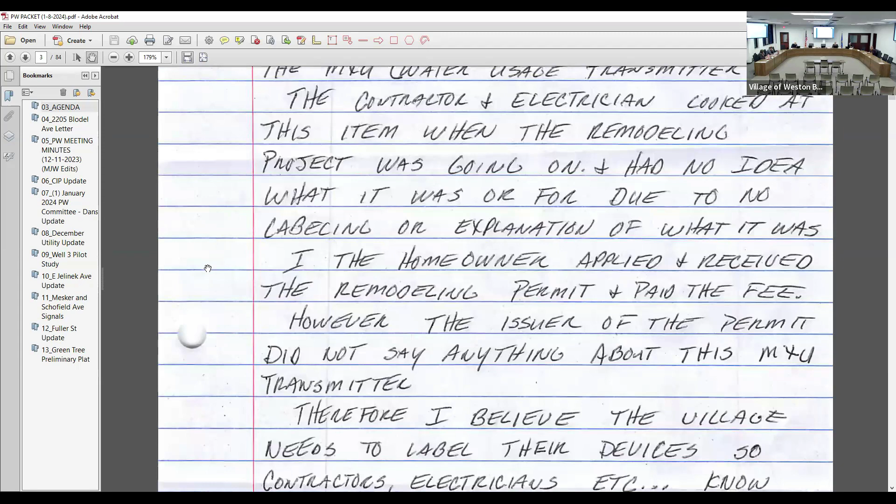But I guess, did everybody read his letter? Yeah, I read the letter. I couldn't even figure out how they did that.

I'll just be like, of course you have them. Like, what do you think that is? I mean, it's not the first time he's there. He's been there probably for a while, right?

Yes, that's the same landlord, right? Owner. I believe so, I'd have to look to see when they bought the house. But he's been there for a while, and he has seen it hanging on the wall. He didn't question what it is, then he went to change siding, pulled it out, threw it out.

I mean, this is the round box, that whole— yeah, it's actually the square box. Oh, that square gas box, over the black hockey puck. On my house, I think they're kind of a beige color. Yeah, correct.

I don't know, so he wanted me to refund, cancel, or void it. I said, well, no, we charge all of our utility customers the same way. You can, I guess, request that the committee waive it, but I can't do that personally.

So how much did you bill them? I had it up earlier. It's $247.48.

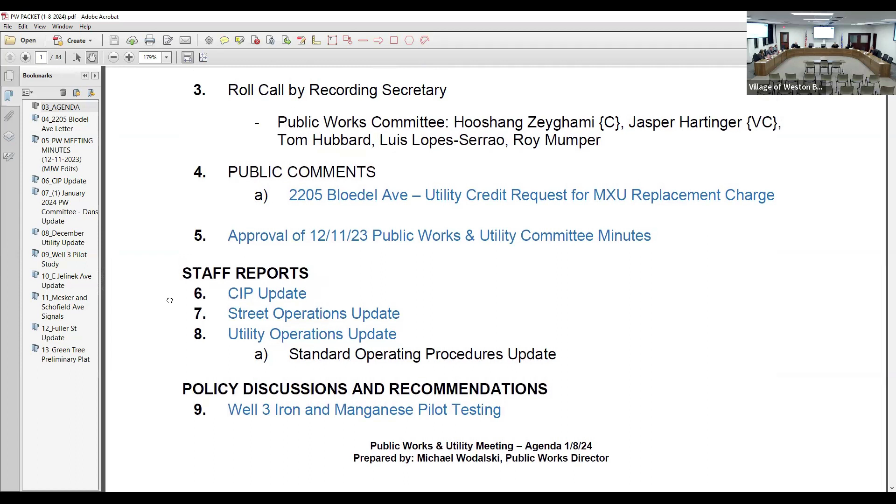Any questions on that? No questions. What he's gonna do is bring us the proposal and all the documents he has for that intersection with regard to the TIP, and also have it on the agenda for discussion.

Unless you need something additional, please. No, the engineer is gonna do what they have to do once we put that out.

Okay, thank you. Item 5: approval of the 12/11/23 Public Work and Utility Committee meeting. Move to approve. I'll second. Discussion? All in favor signify by saying aye. Aye. Opposed? None.

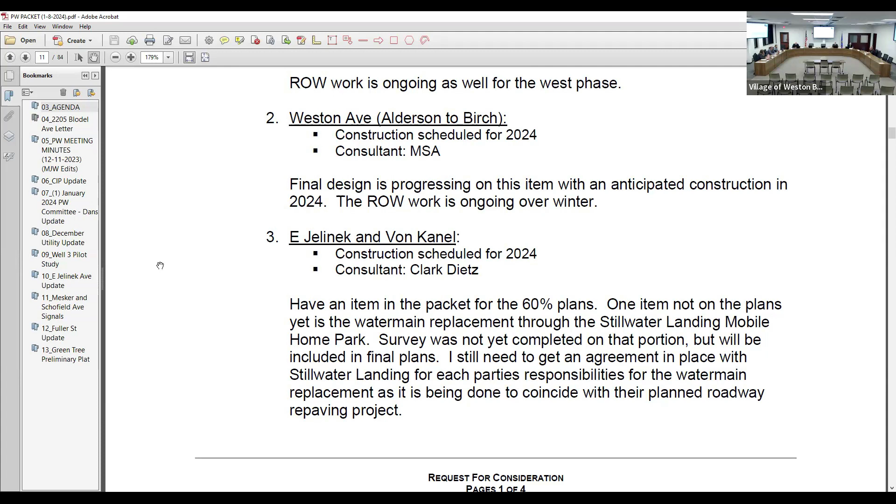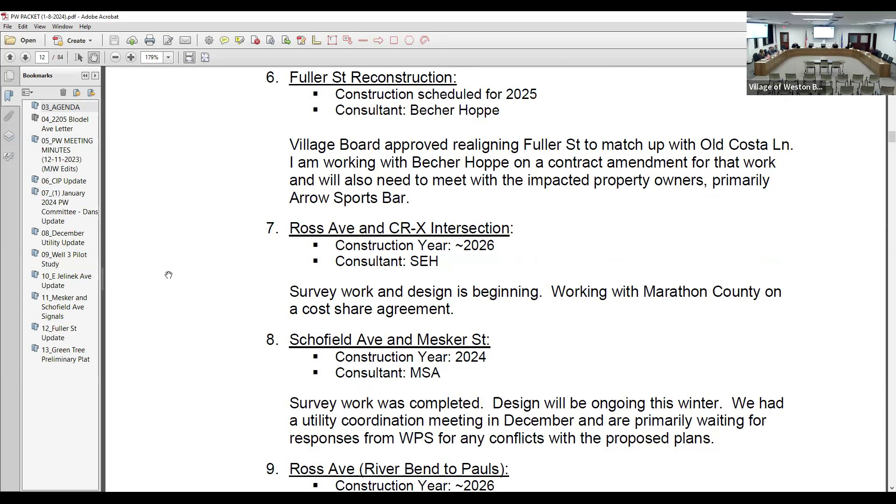Thank you. Staff report, CIP update. Haven't had a whole lot construction-wise since the last meeting in December. Did have a couple design review meetings with Clark Dietz for the East Jelinek and Von Kanel project, as well as the Jelinek resurfacing in front of the junior high and senior high. We also had a DOT meeting with the city of Schofield regarding the Ross Avenue Metro to Alderson redo, and talked with Becher Hoppe about some of the Fuller Street future design impacts. I think I have that one later in more detail.

And I got the RFP out for the Riverbend to Paul's reconstruction on Ross Avenue, so we should have those at the February meeting to review for awarding design on that project.

Construction on Ross Avenue, from where to where? Riverbend to Paul's. My question is, is that all in the town of Weston or is part in the village? It's both. So the first part's gotta be in the village, right? Yeah, the first stretch, the south part's all in the village, and the north part—probably half of that stretch—we have about 3/4 of the road. Then as you head north, right away, both sides of the road are currently in the town. Once you hit Mock Miller Park, it's half town, half village.

So how are we gonna establish our cost sharing? We also have an agreement with the town that'll need to get approved, but it's based on frontage—the same way we handle anything with Rothschild or Schofield. If we have, say, a mile of roadway and they have a mile of roadway, we split it 50/50, but if it's 0.3 and 0.67, it's one-third, two-thirds. I just wanna make sure we agree on everything before we go to design or construction. Yeah, and since it's our utilities, any water and sewer design would be 100% the village's—the town wouldn't pay for that.

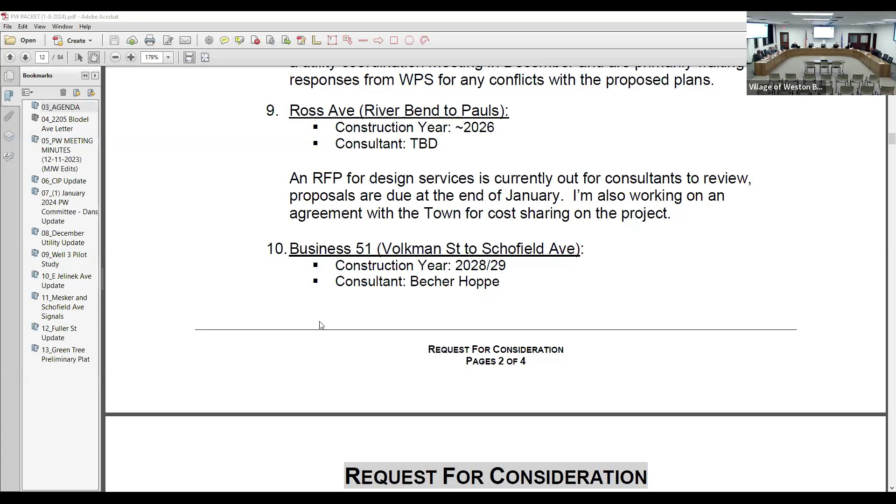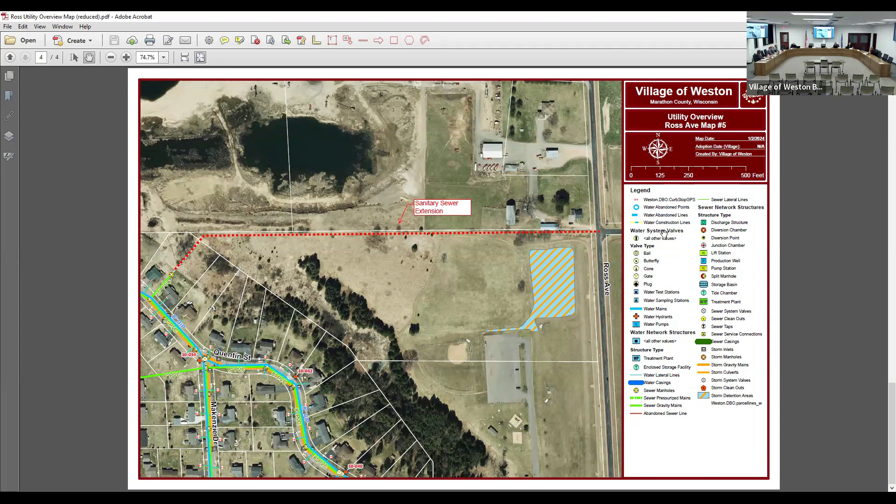Okay, the other one we can get to when we reach that agenda item. Any questions? Anything else, Michael? No, that's probably a good run through there.

Okay, item 7, street operation update. Well, looks like tonight into tomorrow we're going to get our first big snowfall other than Halloween. So how much are we going to get? 5 inches is what National Weather Service is forecasting at 4 o'clock for here, with 20-mile-an-hour plus winds, and then they're supposed to die off, and then another 1.5 inches Thursday night, Thursday later, they're talking.

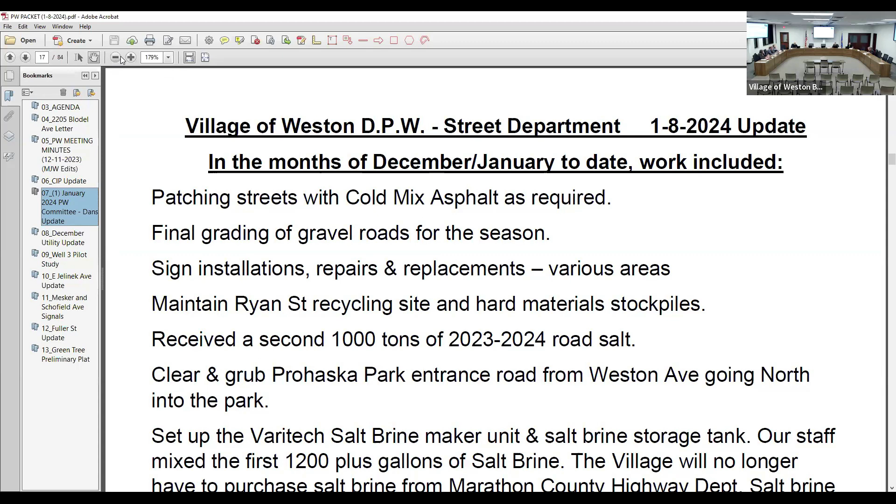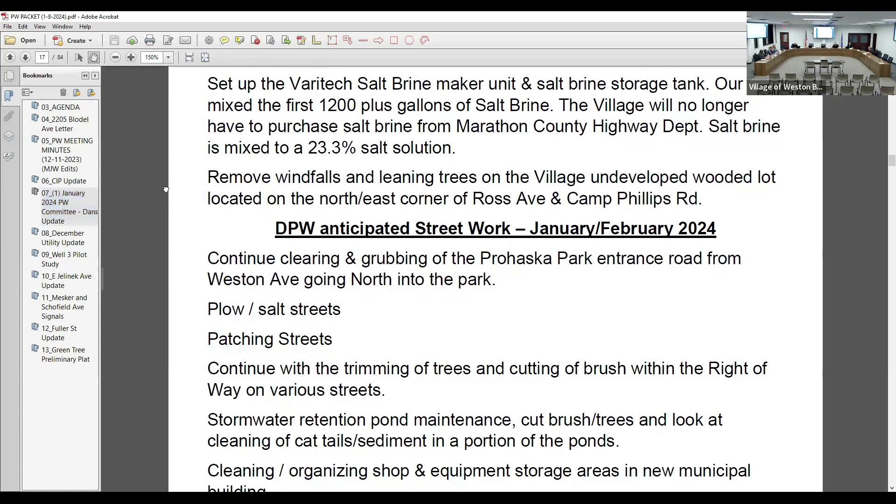So far, between December and January, we've been working on trimming trees, got the mini excavator out, brushing around some of the retention ponds. We try to get to those every year, 2 years at the most. We've got more to go. If we don't get a foot or two of snow, we keep on going on that. We've been working inside the shop, finally finding time to get things done we never could before because we've been too busy. In the wash bay, we put some clips on where we can hang things and handle the odds and ends so it's serviceable.

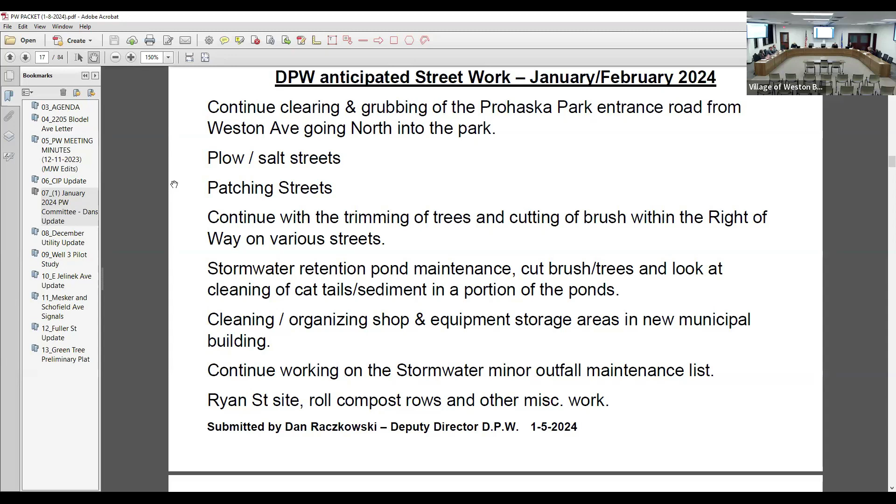The brine maker we bought when we lived at the old building, the guys hooked that up and got it running, so we don't have to go to Marathon County Highway Department and buy salt brine anymore. We make our own here. Got a hydrometer hooked up. It's a Varitech brine maker. We had a brine maker at the county too, an older unit that came out of Dunn County. I talked to them, they upgraded and bought one of the big fancy ones where you can mix salt brine and mag chloride and beet juice together. We're just running straight salt brine, that's all we really need, we don't have to get too extravagant. So we pre-wet the salt - all 6 of the patrol trucks have pre-wet units on them, all computerized. So now we have our own salt brine, which will be nice and save us money and time having to run up to Marathon County to get it.

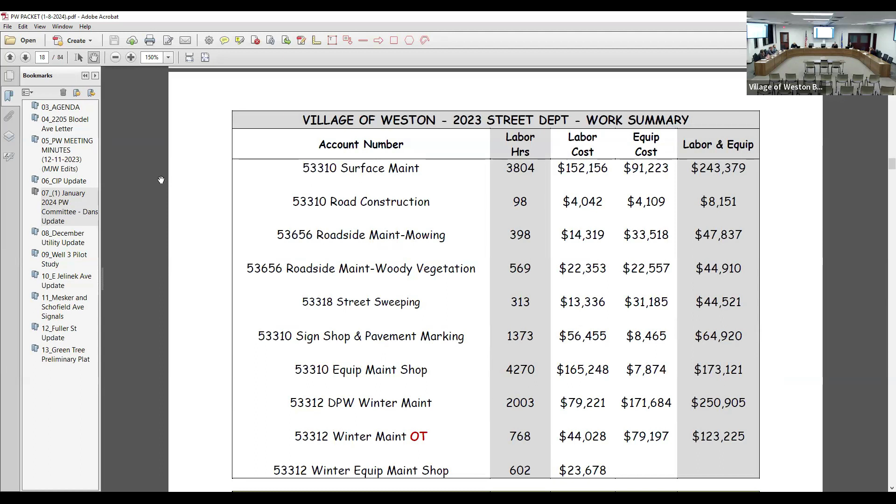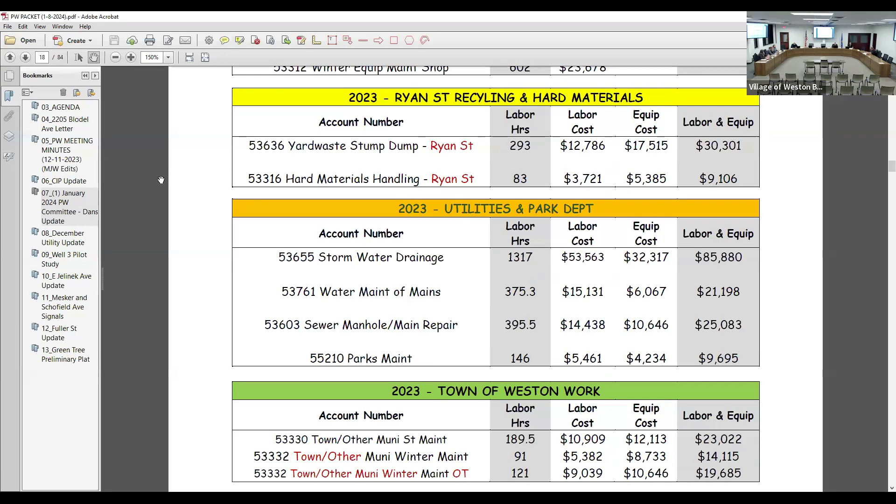It's mostly been brushing work and stuff like that, a lot of woody vegetation work and odds and ends, different things that have come along. That's what we've been up to. We'll see what Mother Nature brings us for the winter, we've still got more of that stuff to do yet. There's minor outfalls, I forget how many, there's some work that needs to be done where there's culvert ends basically on the end of a drainage line and there's a culvert that needs to be brushed around, different things that need to be done. We'll keep going with that, we'll see what Mother Nature throws at us, I guess. We kind of schedule our work around everything like that, just like anybody working outside.

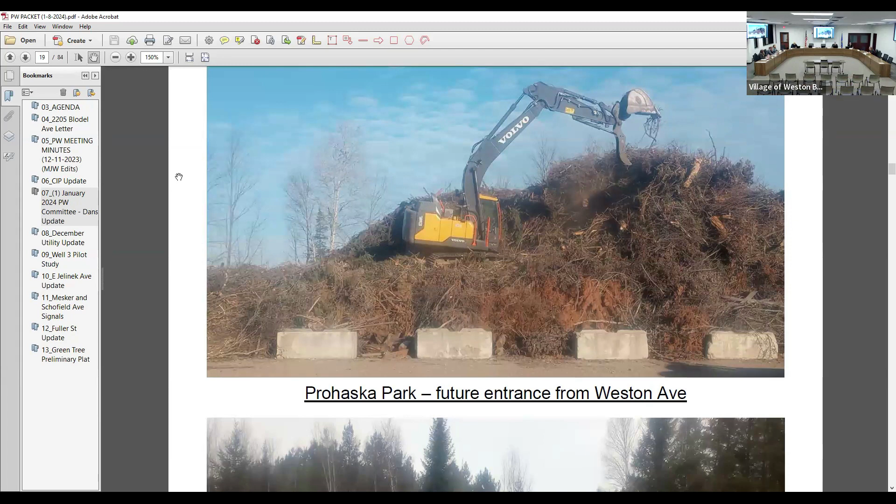I didn't have this on the agenda, but Sue's Ginseng bought - we had 4,480 cubic yards of leaves pickup from this fall. They bought everything for $1 a yard. So between them and Randy Warden, they purchased about $8,000 worth of compost that we had extra. So in 2023 we made about 12 grand just selling that stuff, which was kind of nice, a return on our investment. At least it's better than giving it away, so there's a value to it.

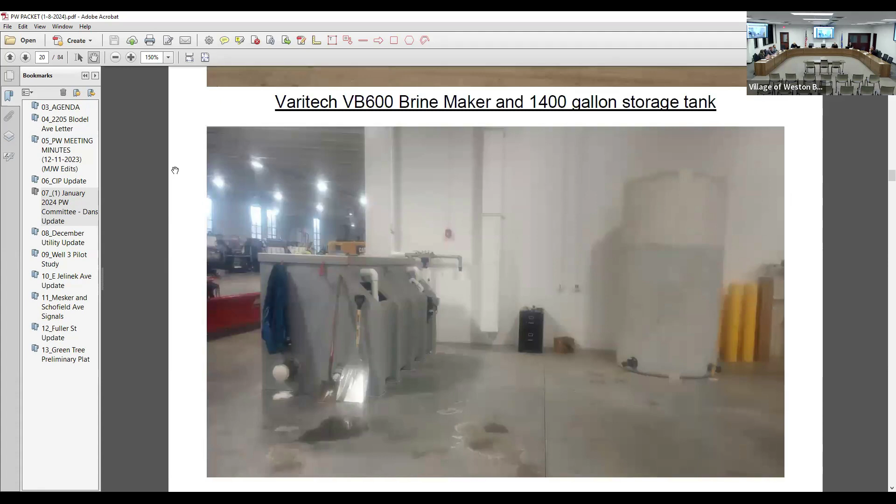Then, one thing too Shane, we got to the trees over here last week. Oh, you did? Yep. Good, thank you. Yep, we didn't clear right up to that duplex there. Like I said, I talked to the woman that lives there and she asked for a little buffer, that's fine. But we took all the leaners out, and took some of the old thin jack pines that are going to die anyhow, and kind of cleaned that up.

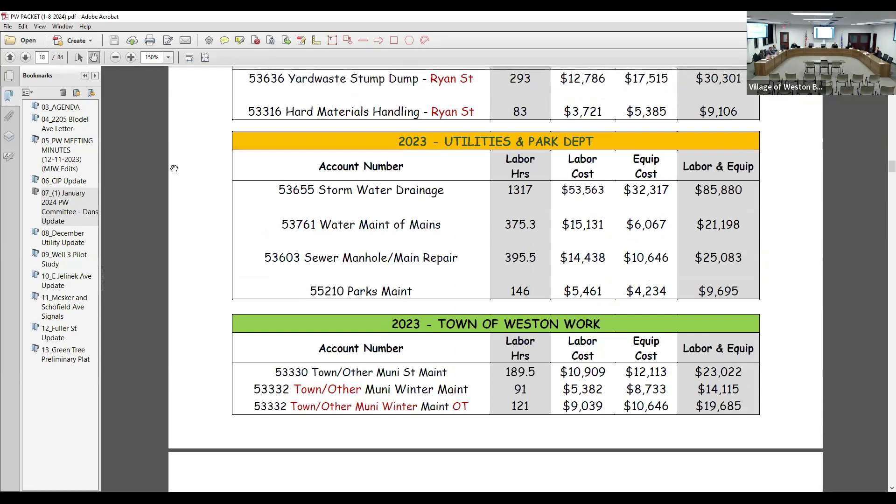It's kind of halfway decent; we do have to go this spring. I talked with her about the back side of their duplex. Originally when this building was built, there was silt fence up on the south side of our fence. She asked if we could, when we pulled the silt fence and nothing happened where it got restored, mow it in the spring, so we're going to do that. That way when they mow their yard, they can get right up to the fence on their side, even though it's our few feet of land there.

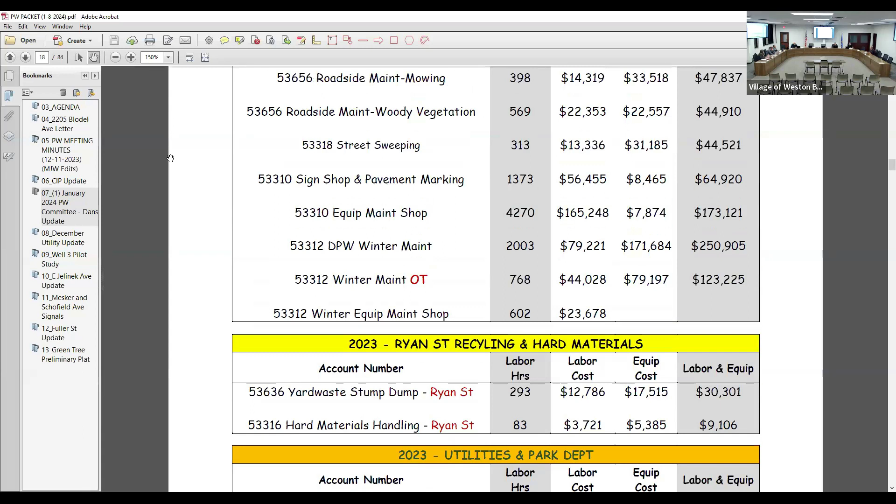In the report, if you look at page 3, I broke down the whole year. I have a spreadsheet that every time I enter time, like today when I did last week's time, everything goes on a big spreadsheet, all the equipment, all the material. I just took that, sorted it out, and threw some numbers at things so it would give you an idea of where our hours were. It doesn't capture everything right down to the penny, but it's a pretty good rough idea of where we spend our time in a year.

I didn't sort it by numbers, but equipment maintenance in the shop has 4,270 hours. Part of the reason that's high is because when we moved into this building, a lot of the stuff we did with the move we just charged to the shop, because I wanted to keep it in one spot. I'm expecting those numbers will drop somewhat as we come into 2024.

Surface maintenance covers everything from patching potholes to all the odds and ends stuff, shouldering, everything that's done with the road, asphalt repairs, stuff like that goes under surface.

Road construction is when we do a construction project, like when we did East Jelinek, we cut down that half mile and rebuilt that piece of road. That would have gone in 2022 under road construction.

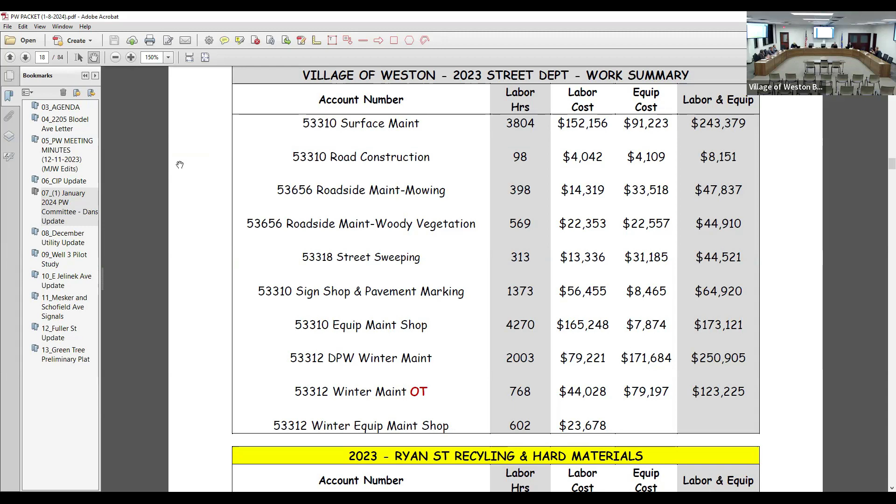Roadside maintenance and mowing is anything we do with either what we call the lizard, that's mowing like along Schofield Avenue, or when we take the John Deere boom tractor out and mow the right of ways in the country, mowing wider with the boom on it, and then we use it for cutting brush too, to keep the brush down.

Street sweeping is just a given, that's anything we're doing with the street sweeper. In the spring, we'll take a loader with a big power broom on the front. Rather than running the street sweeper up and down from the center line, we'll broom it easy, hopefully on wet days, kick it out in a windrow to the outside, and then take the vacuum sweeper and sweep.

The sign shop and pavement marking is everything John Yonker does with help, when it comes to repairing and installing signs. We bought that walk-behind Graco sprayer this last year, so he's been starting to get us caught up on restriping our crosswalks, and any special stuff like special markings, arrows on a roundabout, the little yield triangles, that kind of stuff all falls under that.

Equipment maintenance is the shop, that's everything that goes on in the shop. That includes cleaning the shop, which our staff takes care of. We get a rainy day or whatever and all of a sudden it's getting pretty grubby, so we have to clean it, and everybody gets together and takes care of it.

Winter maintenance was everything in the 2023 calendar year that we did when it came to plowing, salting, hauling snow, anything like that goes under winter maintenance. You'll see the overtime hours for winter maintenance right below it. The last one on the top list is winter equipment maintenance in the shop, like when they go out, they were out over the weekend. Today they'll go through the trucks, clean them somewhat because we were going to reload for tonight into tomorrow, that's maintaining that winter equipment.

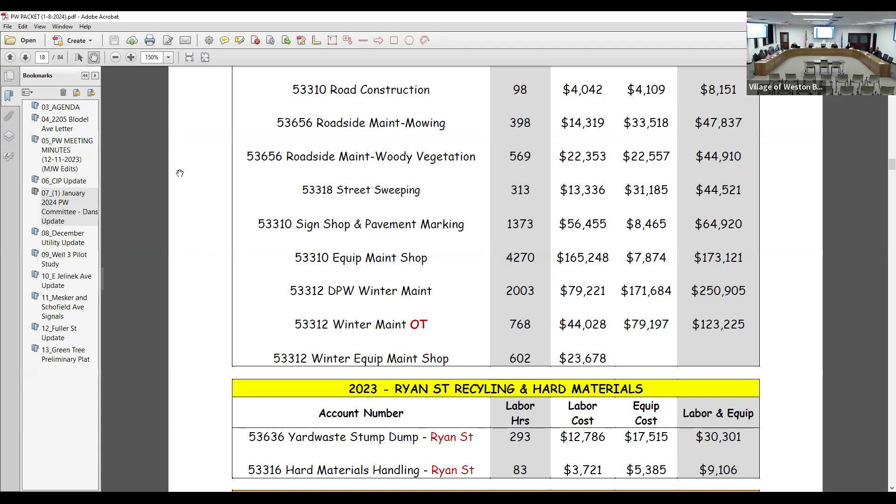Then as you scroll down, you'll see the hours that we put into Ryan Street. The yard waste, they nickname it the stump dump.

So anytime we got to go and push up brush, push up leaves and that kind of stuff, or haul the leaves down below and put them in rows for compost, or roll the rows of compost. We currently have, I think, either 3 or 4 150-foot long rows that are probably 8 to 10 feet high to a peak.

We take a thermometer and have to take temperatures on them once a month, and then we'll roll those rows over — that's what the DNR wants. So it gets some air in there and keeps breaking down, and we have to keep records of the temperature, because if you're gonna use compost, they want to see it get up to 130 degrees in the middle. That kills off the bad bacteria.

And then the hard materials handling would be anything when it comes to stockpiling things at Ryan Street — all of our gravel, sand, stuff like that. If we get sand hauled in, we gotta push it up. That's what it kind of comes out of that fund.

And then the stormwater drainage, that's anything to do with stormwater. Like now, even when they're out brushing with the mini excavator around these retention ponds, that gets charged to stormwater drainage. Anything with curb, inlets, catch basins, storm sewer, that all goes underneath there. When we did asphalt overlays off of Birch Street on Leyburn and all those streets this last year, when we raised the manholes for the storm sewer, that 1.5 inches for the overlay gets charged to stormwater.

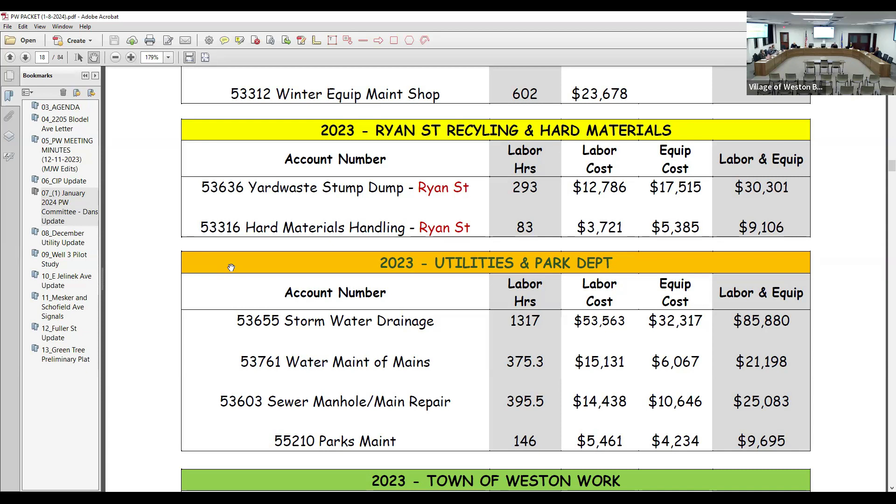On all the storm sewer inlets, any manholes, the rectangular storm sewer inlets, we have the same thing — that's what we use. And then parks maintenance was anything we help the parks out with. Sometimes they're taking trees down, we grind stumps in the spring. If they took trees down, we'll rent a stump grinder, put it on that newer skid steer we've got, and go out and grind their stumps or whatever we've got.

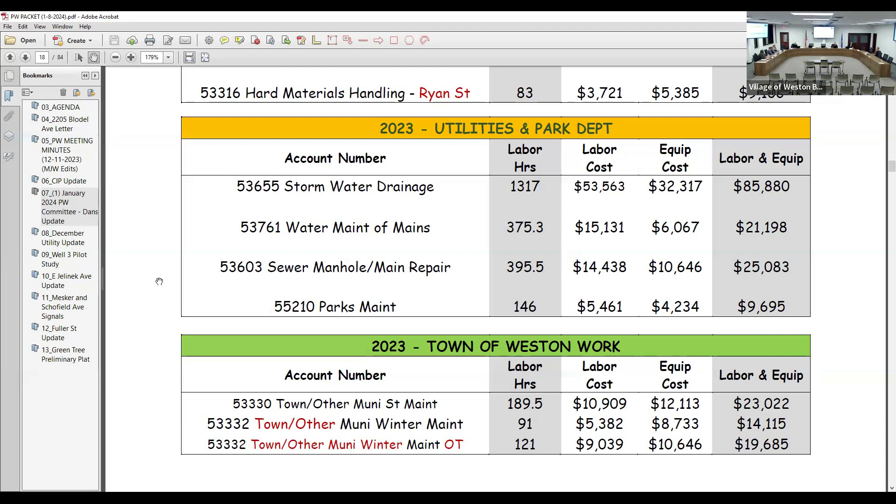How is the — go ahead. How's the, we had problems last year with people illegal dumping over at Ryan, is that getting better? They're not out on the streets so much anymore. I was just up at Ryan Street today and I see somebody dropped 3 tires off up there. Everest Metro's helped a lot at Ryan Street because they've been coming through there, and I think the word's gotten out where people aren't doing that as much as they used to anymore.

So the dumpster's still a little bit of a problem, but for the winter we pulled the trail cams down, and someday if we get power out there it'd really be nice to have a video camera. Then you could get them, because it's kind of a pain having Randy lift me up in the loader bucket to the telephone pole to pull the chips out of it and put different ones in the trail cam. But then when you get 600 pictures... it's helped, I've sent them to Everest Metro — sometimes you'll snag somebody. Is that something that's worth looking at from a cost standpoint?

Yeah, I guess it's kind of the cost benefit. I mean, if we're spending $3,000-4,000 in extra garbage, or we have to spend a couple hundred thousand dollars to get power extended.

I think the word gets out, and that's the main thing. Once the word gets out, it'll curb most of them. You never stop everybody, but they pinched a few contractors, and then the word gets out. If they're just bringing a little bit of brush here and there, it's not a big deal. It's when they come and dump a load of slop, or it's more. What gets you the maddest is when they take and throw something in the middle of the pile, and then you got to pull the pile apart to get it out.

Somebody dumps something on it, and that's when it's a pain. It's kind of derogatory, the guys, it makes them crazy. Makes me nuts too. But for the most part, I think just having the trail cams up is helpful.

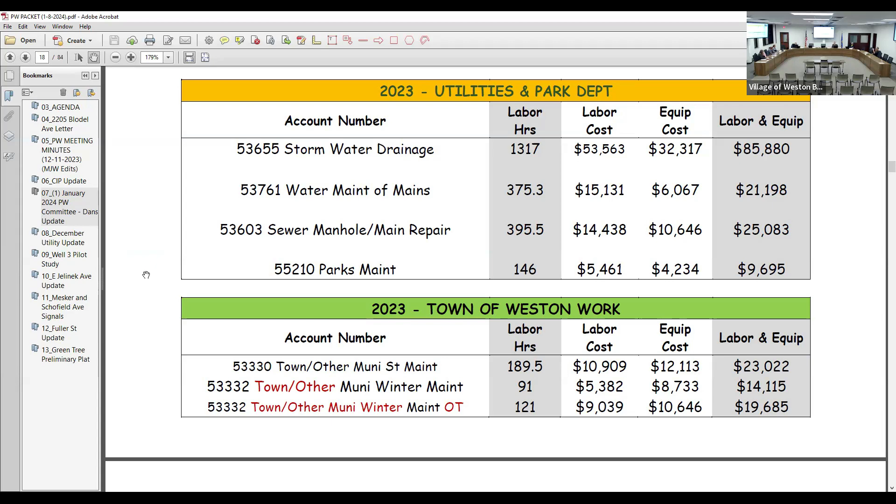Tushane, did you have a question? I was wondering, there's no total in there. Any reason for that, or total of the total cost for all these, each section you have there?

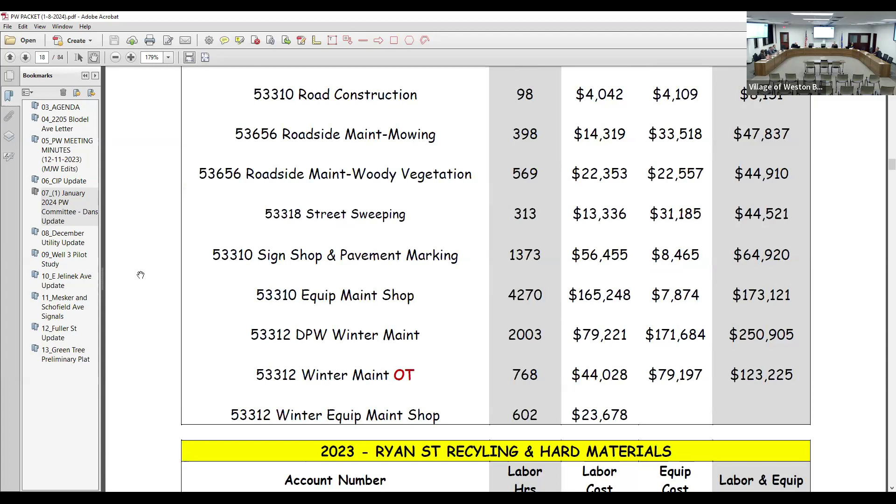I can total it and send it to you if you want. It would be nice to see it. What's the total cost for each part you have in there?

I guess, yeah, I would like to see. Well, what I'd probably do is ask Jessica for a report from finance. That would be to the penny, you know what I mean?

Because what I do is I enter the time electronically. The guys have their hourly into our software. That calculates their paychecks. Everything else I do, because one thing you gotta remember on this, the equipment is factored into here. And the equipment rates, I just updated them again, come off the Wisconsin DOT website.

So those are the numbers I'm using. She wouldn't have that, she would have the labor expense. I could pull the other stuff, but if you want a total, I can run it.

Sure. No, they use DOT, why not Marathon County? That's what Marathon County uses. Use the same thing. And the way it's generated is all 72 counties in the state sign a routine maintenance agreement with the DOT.

Every piece of equipment they work on or buy, when they buy it, you can depreciate it out. They've got a schedule for depreciation. Everything that goes into that piece of equipment, they have to track. Fuel, tires, labor for parts, the mechanics labor. Each of the 72 counties sends that to the state.

And they have classifications for all the different pieces of equipment, and that's how they develop the rates, and that's what they reimburse the county for. So it's the same thing that the county's getting reimbursed for.

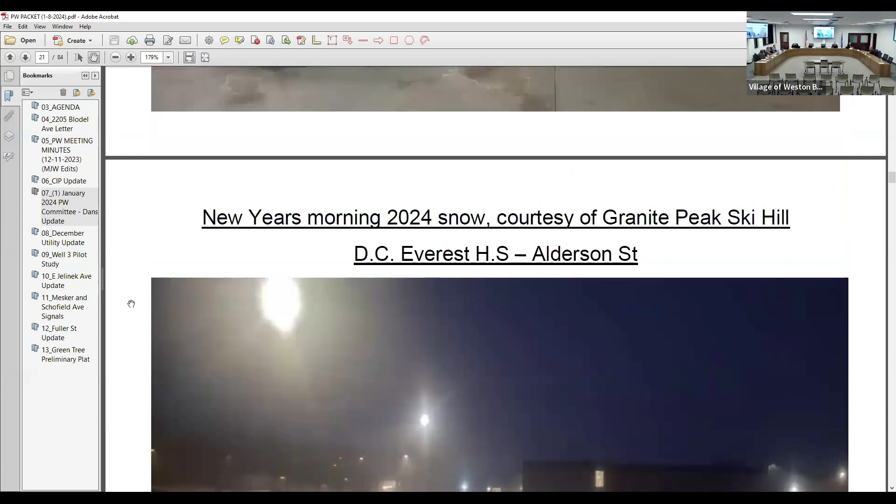Utility operation update, you're gonna take care of that, Michael? Sure, Josh is homesick today, so I guess I'll cover it.

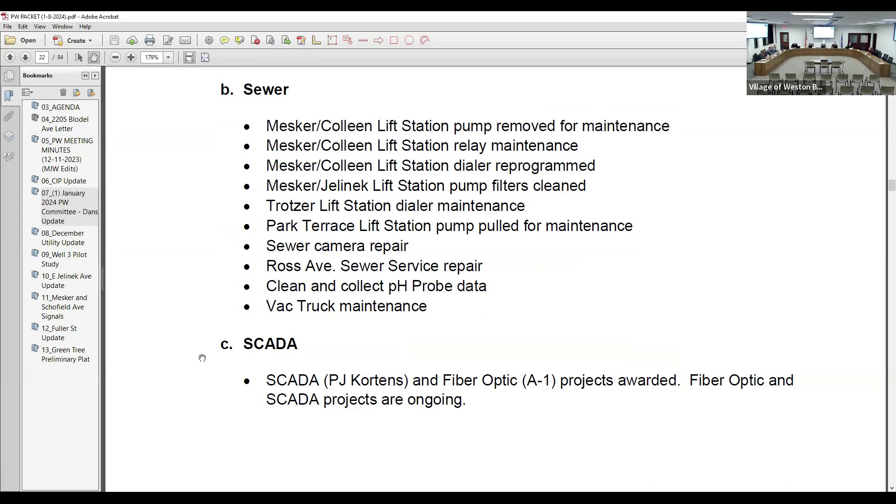Listed kind of just the general pump maintenance, some of the chemical feed pumps. We had some meter cleaning repairs over at Cary, some manganese backup or buildup in those, and got quite a bit of our large lift stations taken care of with the warmer weather. So good opportunity there.

The SCADA project, fiber is more or less run as far as the conduit, and they're getting the cabling pulled on that one. PJ Kortens should be getting pretty close to reprogramming all of our lift stations for the SCADA network, and then getting the water systems on the new SCADA as well. They indicate to have that done by mid-March, which is ahead of schedule, but we'll take it.

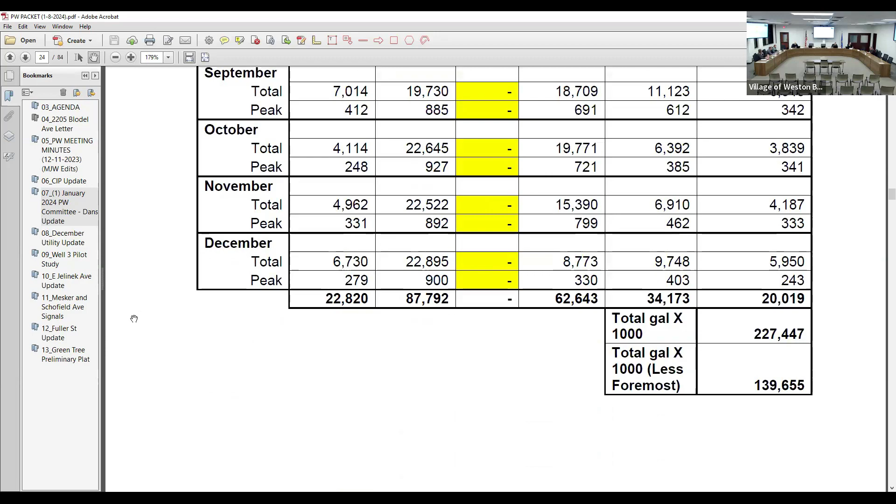I don't know, not a whole lot. There's maybe else in here that's real eye-opening. And then he did add a few more of the SOPs for some of the various items here.

We did briefly talk about well 7 and 8 going up, we'd like to do a little thing out there. When they're ready, we can give you more information, but it would be nice for the committee and then the Board of Trustees to just recognize that.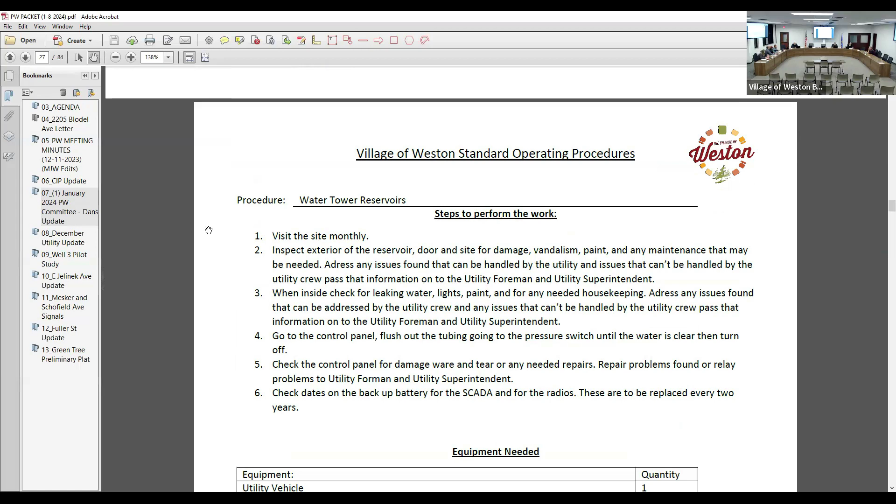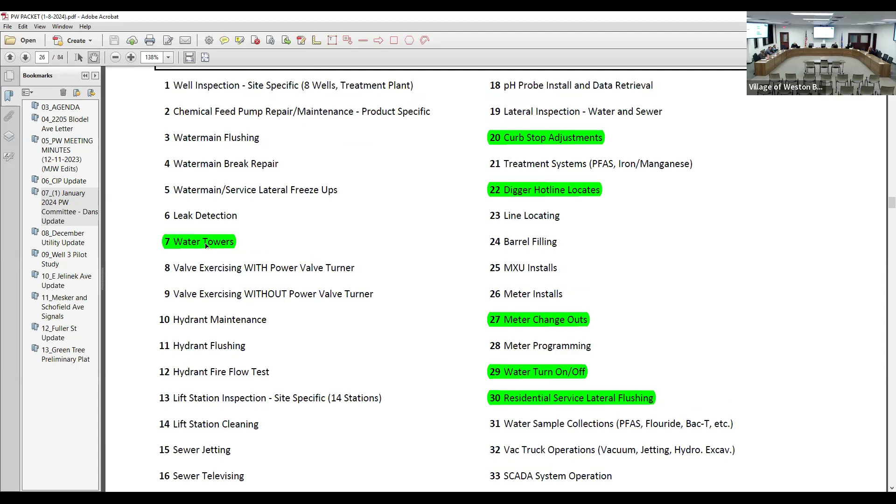Okay, and here you have the standard operating procedure. So we wait for Josh to come back. Yeah, I guess they're just adding in there. I know trustee Hardinger asked that those just kind of be noted monthly here as we get more added in, so we just wanted to keep everybody up to date that we're getting those taken care of. I think what he has here is pretty good. Yeah, no, it looks good.

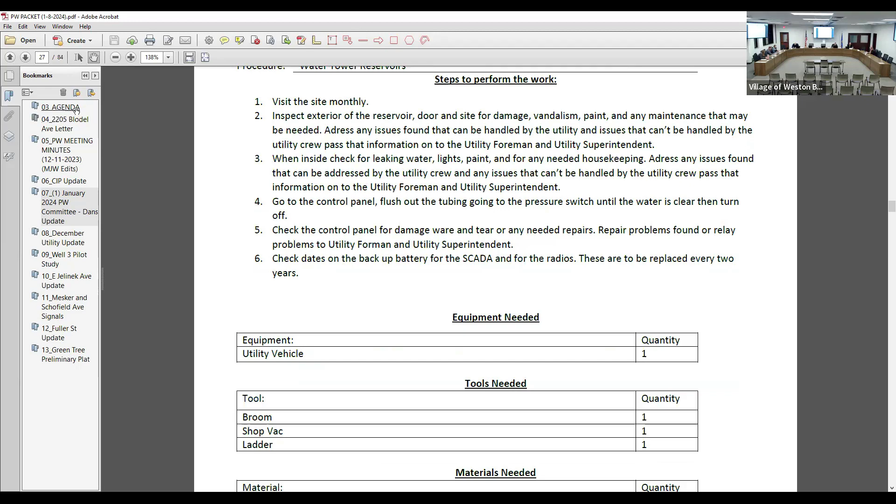Okay, all right. Policy discussion and recommendation, item 9: well 3 iron and manganese pilot testing.

As part of the PFAS treatment system for wells 3 and 4, when we submitted our safe drinking water loan application to the DNR, they had asked that we separate out wells 3 and 4 due to the fact that well 3 needs iron and manganese removal prior to PFAS treatment. They're requiring that we have a pilot test done to show that the system we'd be putting in place would adequately remove the iron and manganese from the water prior to the PFAS treatment.

So the first step would be getting that pilot study done. We have a proposal from Water Surplus, which is the same company we currently are leasing the temporary PFAS treatment system from. I'm talking with AECOM. The proposal from Water Surplus was less than what AECOM would be able to give us for a proposal for pilot testing, and they'll take care of all the DNR reporting and submittals as part of that.

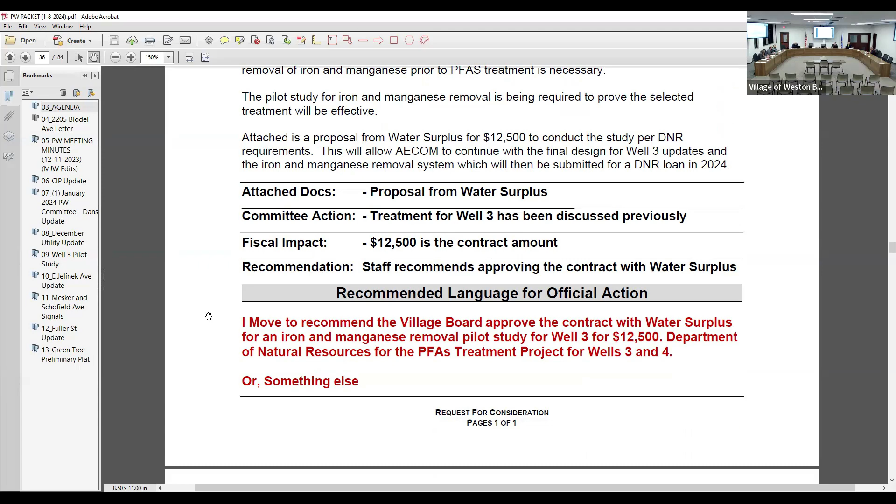So I guess I'd recommend we move forward with the pilot testing for well 3 from Water Surplus for the $12,500. I see in his contract, he explains his insurance and everything else in there, but I think he should give us a certificate of insurance with the name of the village in there as a part of that insurance also.

Yeah, and we always ask for that before they come on site. Do you have to be additional insured or just a certificate of insurance? Yeah, usually we ask to be named on the certificate. But named as a certificate holder or named as additional insured? As additional insured. Okay, not certificate holder. Yeah, that's what I wanted to clarify. Yeah, because one means everything and the other means very little. Yeah, no, we get added on there. Yep, I think we should be there because it protects us. Yeah, that saves you from being sued by somebody who's not your employee getting hurt. Right, right. Okay, what's your wishes?

I would move to recommend the village board approve the contract with Water Surplus for an iron and manganese removal pilot study for well 3 for $12,500.

Department of Natural Resources for the PFAS treatment project. I probably did delete that. Yeah, you can. Sorry, we need to include that, right? Is there a second? I'll second. Discussion?

All in favor, signify by saying aye. Aye. Aye. Opposed? I have it, thank you.

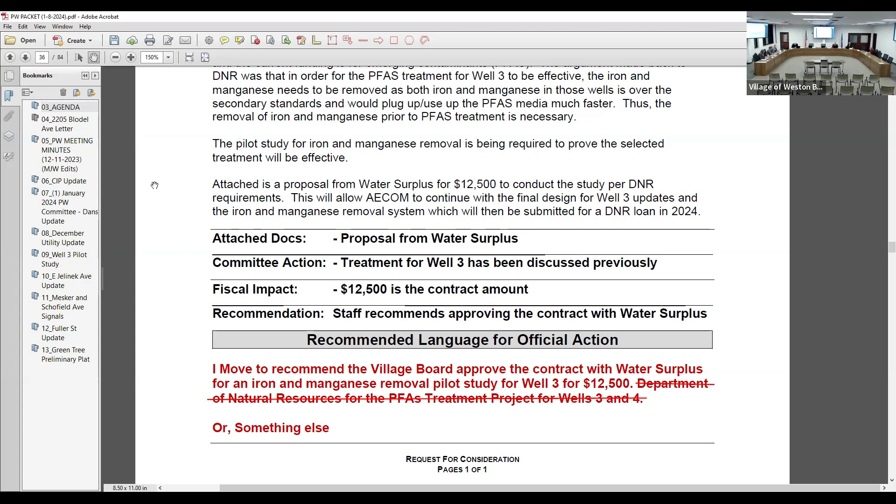While we get well 3's final design taken care of through the DNR, in 2024 we'll resubmit well 3 for the safe drinking water loan. So it'll stagger by a year, but we got as much as we can into the well 4 design, so the well 3 work is just the iron manganese removal. It also helps maximize the principal forgiveness we got for the PFAS treatment, so the 3.14 million we got is still usable. So that answered the question.

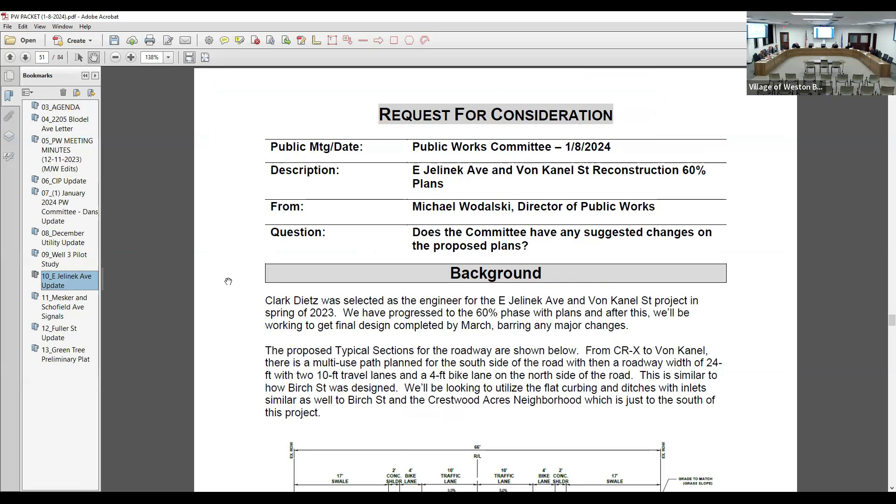Okay, item 10, East Jelinek Avenue and Von Kanel Street reconstruction, 60% plan design discussion. As I mentioned, we had a couple meetings with Clark Dietz this fall. Plans are at the 60% phase, so I just wanted to get concurrence from the committee that we're good with where we're at, and we can get these into final design.

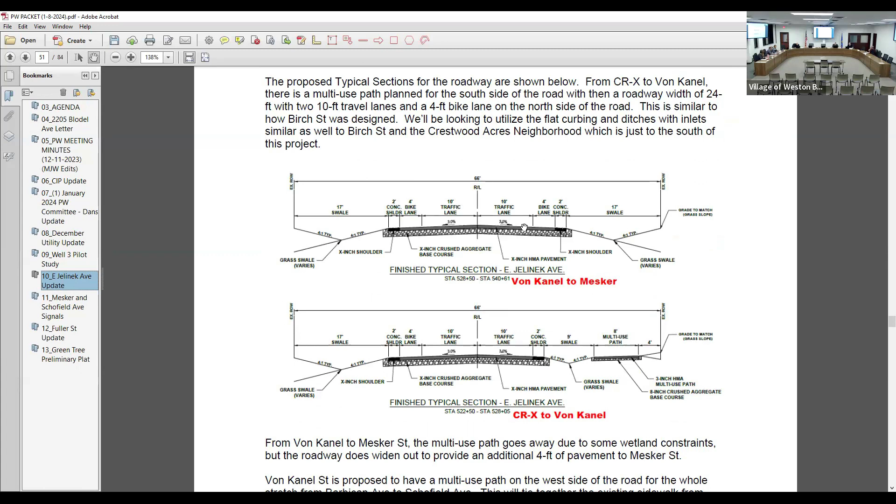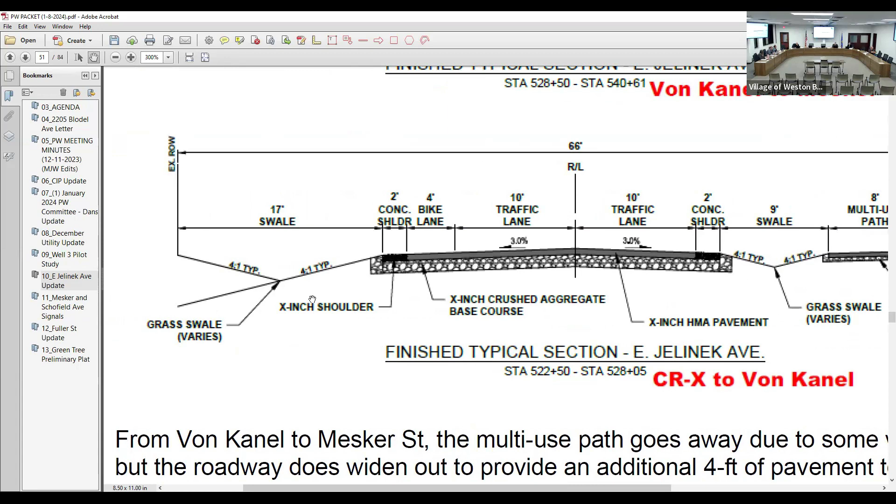So these are the typical roadway sections we're looking at. From Von Kanel to CR-X, we would have a multi-use path, generally on the south side of the roadway, and a swale. Let me blow this up so you can see better. A 9-foot ditch would use the same flat concrete shoulder that we have over in the Crestwood Acres neighborhood. We have 2 10-foot travel lanes, a 4-foot bike lane for westbound traffic, a 2-foot shoulder, and then a swale on the north side matching into the existing right of way.

On East Jelinek, east of Von Kanel to Mesker, the multi-use path goes away and we have wider pavement, 14-foot lanes, striped as 2 10-foot lanes with a 4-foot bike lane or paved shoulder, the concrete shoulder, and ditches matching into the adjacent property. I should have noted, this is the same configuration that would be used on Von Kanel, except the multi-use path is proposed on the west side. Otherwise it's the same, still using ditches and the flat concrete shoulder. So that's currently what's in the plans, at 60%.

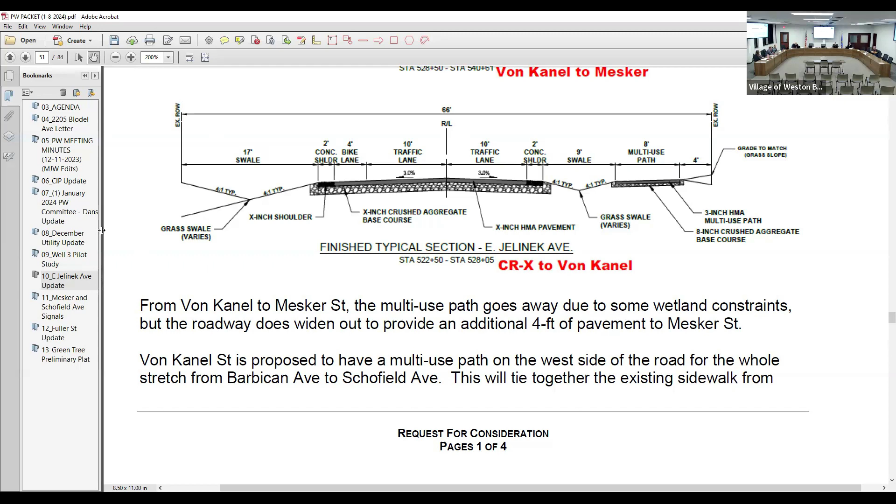Did you do drilling at the intersection of Von Kanel and Jelinek? Soil borings were done. When was that, last month? I just want to know where the rock was. I'm still waiting on the report from AET, but the drilling was done, so we can send the boring out and read it. That's okay, I think we should know that.

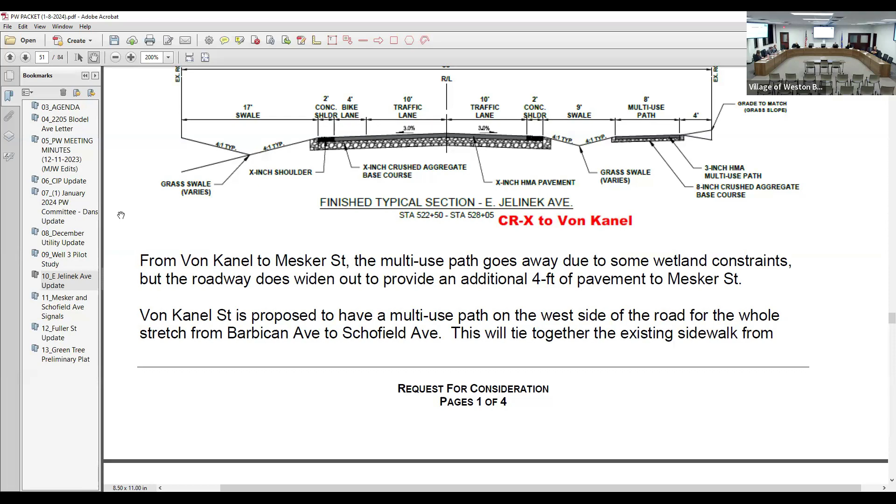And the other thing is, it's showing 3% slope on the road, why? We use a 3%, it's kind of been a village standard as far as I've been here. I was always told use 3%. Over time, when the road settles, a 3% will still settle to like 1.5%, so you still get good positive drainage, whereas 2% roads tend to get inverted. You assume it's going to settle uniform, but that's not happening. That was a Don Smith thing, Keith continued it as far as I can tell, our as-builts were 3% cross slopes. Usually a street recommendation is 2%. 3% is kind of unusual. Yeah, it is.

Yes sir, so help me out here, so it's 3 or 2%, and you're saying over time it settles to 1.5 or 1? So only the center settles, not the sides? Generally speaking, the center tends to settle, and the curb won't settle. Why? I don't know, it's like wheel ruts from traffic as it drives over it. It's the loading of the road, especially trucks, semis with duals.

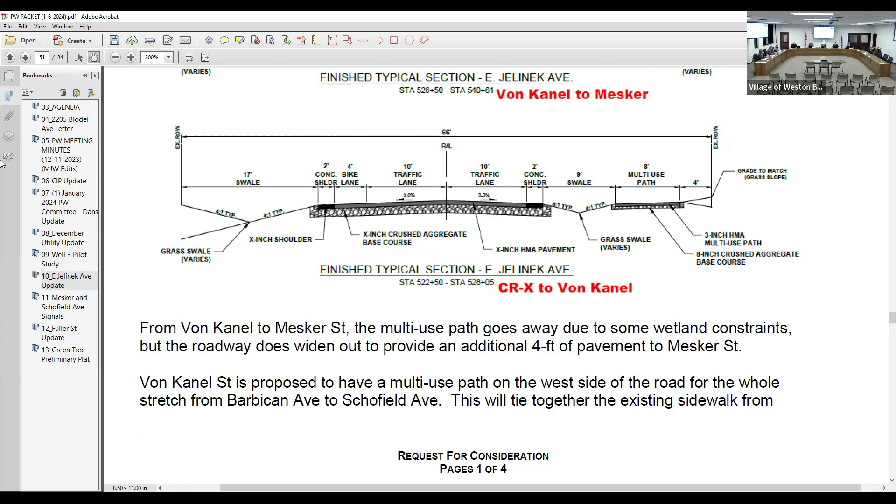Well, if you just go look at a road that we used to lane wedge on the county, well, I'm just looking at that, there's a cut section right there. Yeah, to Hushain's point, if it's 2 inches or 2%, you would think it would just stay 2%.

We went to 3 because it settles to 1. We've used 3% on every street that we've redone since I've been here and before me. The DOT standard is 2%, and that's usually one thing we have to call out or ask for an exception on when we have a DOT grant. I can only think of one where they didn't let us use 3%, Northwestern, that had to be a 2%.

The other thing you gotta think about is the frost. Your frost in your roadway where it's paired up, you get a really bad winter, it'll go down almost to 5 feet. So the more your frost moves up, it's like creep on something. If you ever see a piece of concrete approach on a house move away from it, you'll see the crack grows, same thing, it's from the frost action. You go down Tennessee, you don't have to worry about it, but up here it'll eventually walk itself away. But I believe part of it is due to the frost, because you get so much more, so it's moving more.

We were down on Kellyland today, looking at what we're gonna be doing this year for storm sewer. Every one of them streets is like this or like that. Granted, they're from the 80s. Yeah, the 80s is when Don Smith was here. So you're putting all your money on Don Smith.

I would come up with some different verbiage than saying that's the way it's always been. Well, so if it's inverted now, even if it had been a lesser slope, it would have been even more inverted, I guess, would be the other argument.

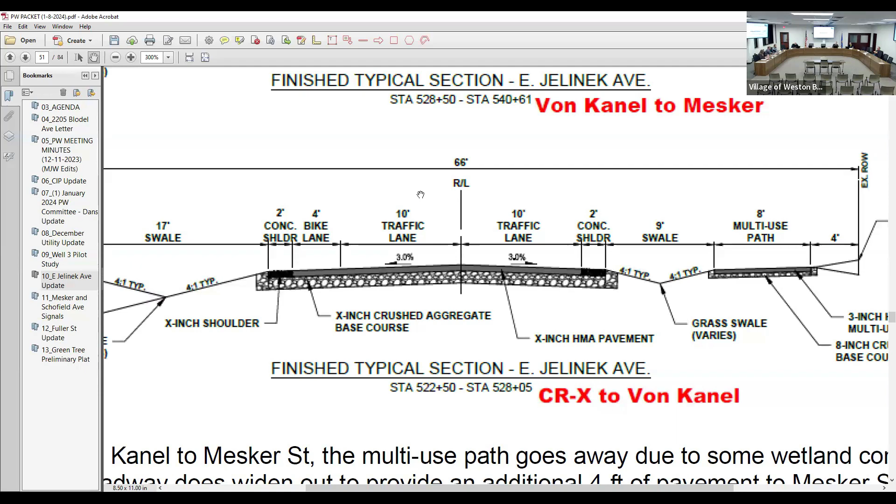And then you're throwing this roundabout in here. So that's a question, those are questions that I'm asking. So one thing that's come up is, in the past, we've had residents talk about speeding on East Jelinek and how it's used as a cut through for people that don't want to go through the Schofield Ave, County Road X intersection. So right now we're currently leaving it as is. It's stop controlled on Von Kanel and through traffic on East Jelinek.

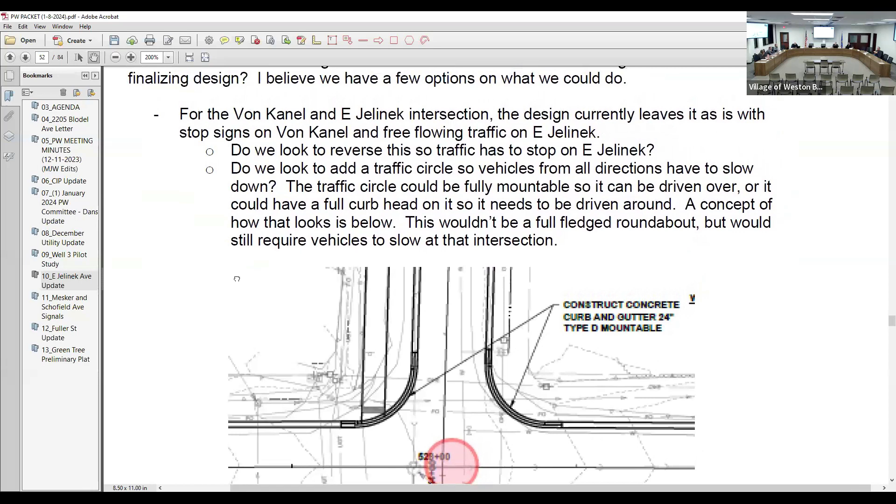You know, do we want to do something different, I guess, is a question. Do we want to reverse it so traffic on East Jelinek has to stop and Von Kanel is free flowing? I drew this in there. Do we want to add a traffic circle? It'd be a way to slow traffic from all directions. It could be fully mountable to drive over, or it could have a full curb head in the middle, so it needs to be driven around. I guess that's kind of just a center placement.

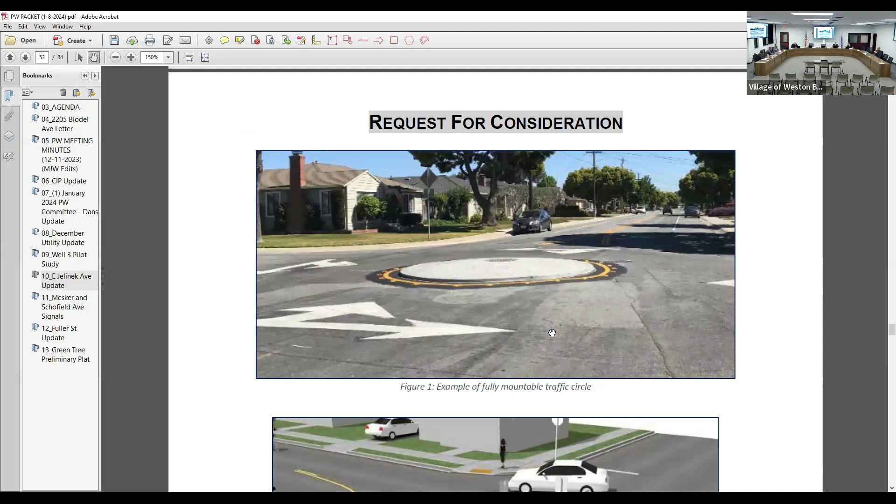So this would be a version of one that you can drive over, but you would still generally have it signed and marked as going around. Here's an example of one that's raised where you go around it.

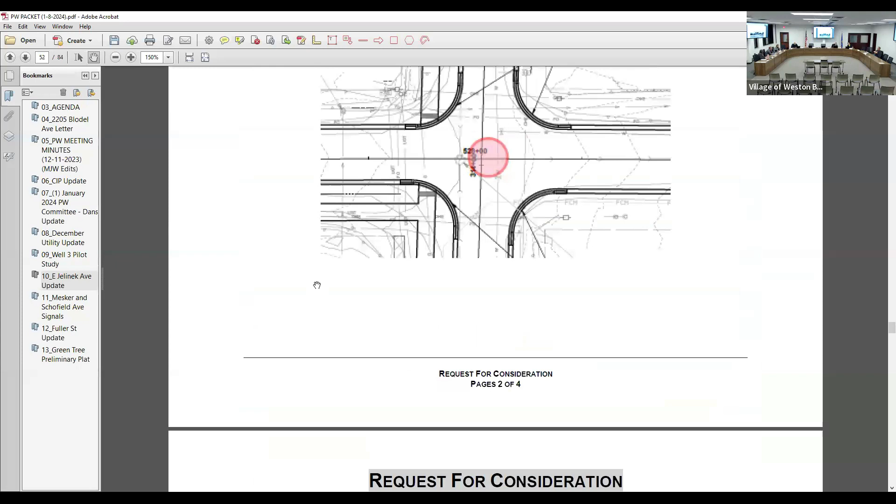Do we have it in the village now? There's actually one in the Tower Ridge subdivision, kind of right behind here. And for some great YouTube videos, people hit those. How's the one at Barbican? That's a full roundabout, Streets of West.

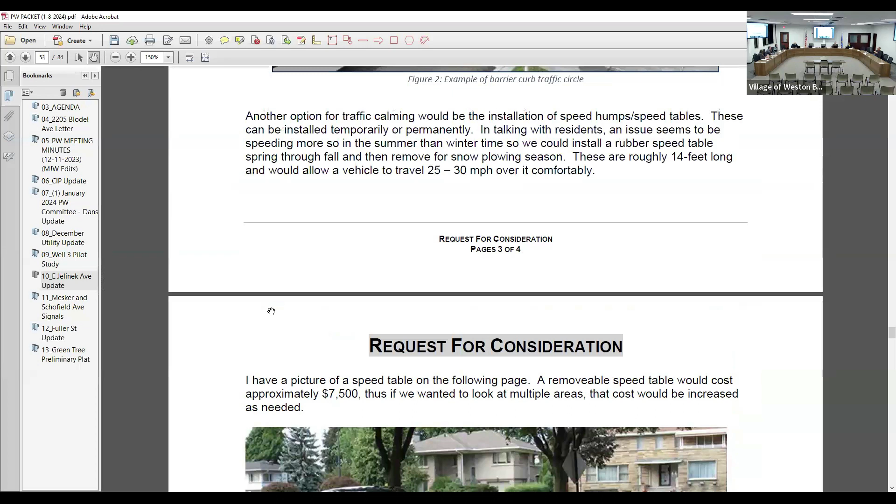So I guess that was just some questions. Other idea would be to put in some speed tables or speed humps. Do we have information like traffic counts or anything? I'm just trying to compare this to other roadways, to see at what level do we roughly stand.

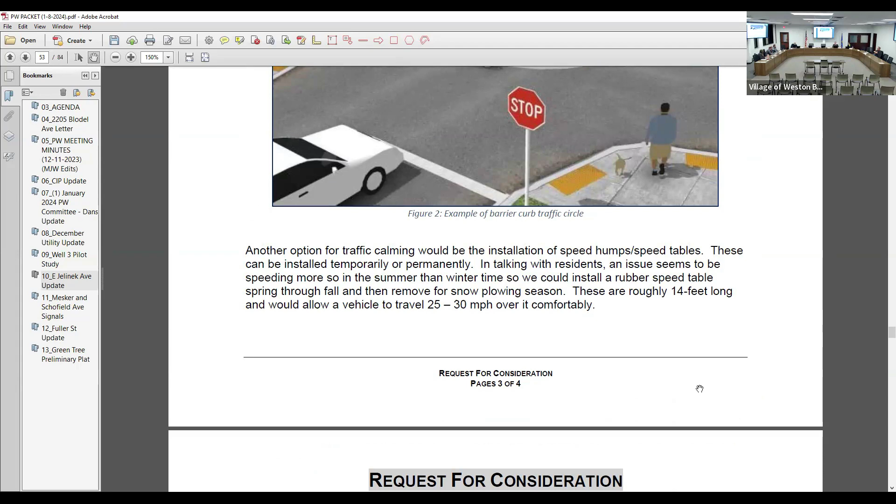About 600 vehicles a day. So it's not a huge number. I was surprised, I'll be honest. My impression when I read this, I thought - I guess I don't drive that way a lot. I did for a few weeks when they had Camp Phillips torn up and I had to get through that way, and of course the traffic was crazy because everybody had to take it. My first thought was I didn't realize there was that much traffic on it.

Michael, quick question. I know every year they put the speed trailer on East Jelinek, kind of by the substation, up on the hill there. Do we get any data as far as the average speed or high speeds from that trailer that could help us? Because, as somebody who lives one house off of East Jelinek, I can attest that vehicles go pretty fast through there, and there's also a lot of truck traffic which isn't supposed to be on the road, but that's another issue. I'm just curious if there's any definitive data about speed.

Yeah, the 85th percentile speed was about 37 miles per hour, so 12 over the speed limit in that area. Thank you. Go ahead. Are you done? No, I was just saying thank you. I'm done.

The traffic in the morning is higher, at least when I had my office at that end, on the east end of it. Everybody takes a right turn from Camp Phillips. In the afternoon they don't go that way, they go to Schofield to use the stop light, because it's harder in the afternoon to take a left turn in there. Yeah, taking a left off of Jelinek onto Camp Phillips in the afternoon - that's what I was gonna say, more often than not I take a left onto Von Kanel and head down to the Barbican intersection, because it's almost impossible to make a left-hand turn onto Camp Phillips from Jelinek. A lot of people do that, yes.

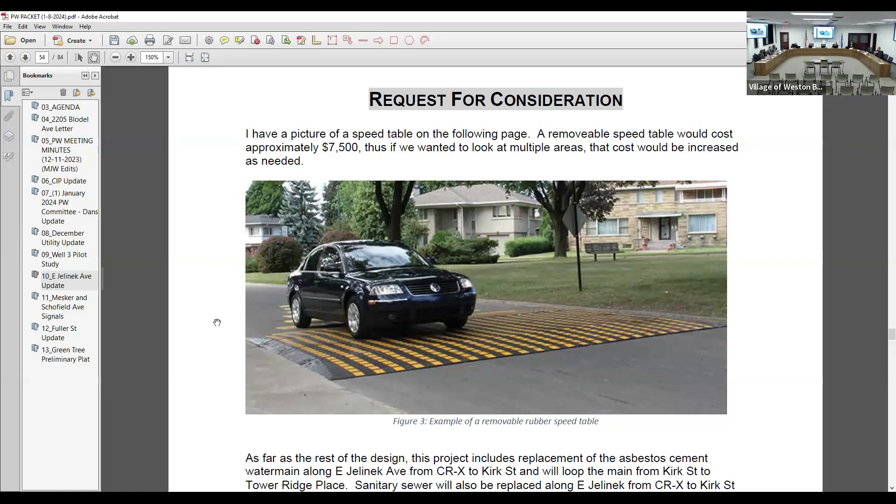I think we should go back to the original layout or cross-section and see if this is acceptable to the committees, so we can make a recommendation, because that's the purpose of Michael bringing these issues up.

Do we want to investigate some of the traffic calming measures more, or do we put it in and see if issues persist? We can get a permanent, solar powered radar sign installed so it's not a speed trailer, or put in temporary speed cushions. A lot of these things, whether we do it on day one or a year after the fact, it's probably about the same cost.

If you talk to the two captains, I think you'd get more attention now if they parked some cars there, just to give that road some attention. I know in the past speeding tickets weren't a real big priority, but that's pretty wild right there.

Especially that whole section from Kirk Street over to Von Kanel - you've got the backside of the mobile home park and the WPS substation and really nothing else there, so it doesn't feel like a 25 mile an hour road. It feels like a rural road that you can go fast on. I'll fully admit I'm guilty of it - I've traversed that road myself.

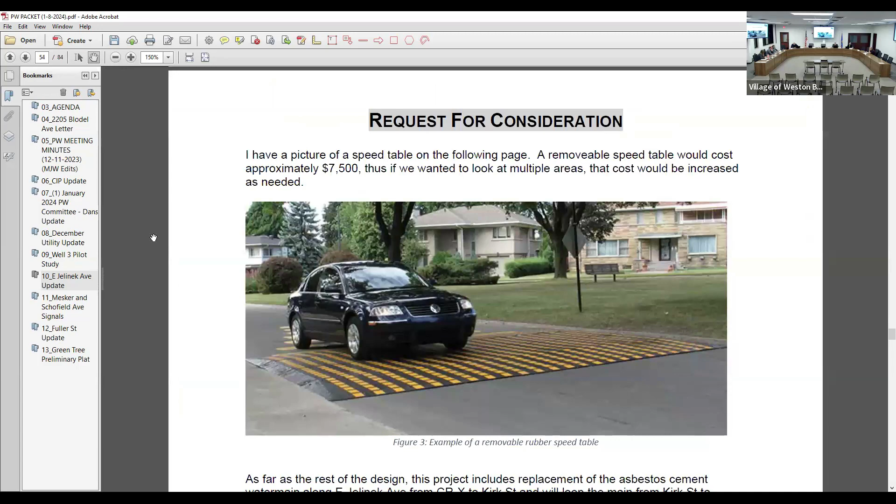I'm sure you had some other comment for this to the design engineer. I'll get back to them with anything there, but if we're not looking to put permanent speed tables or traffic circles, that's fine. Well, we haven't got there yet. Okay, give me time, please.

Let's approve the intersection, the cross section first. I'm fine with the cross section the way that it's laid out. I think so, it makes sense.

Although I thought when you said 10 feet road, and I look at it, then you had 4 feet for bicycle path, and I think we went to 12 feet road because of the snow plow. The snow plow is 12 feet, am I correct? The plows are 12, but on the angle they're probably running 11. I think that's one reason they increased the width of the road to 12 feet. Yeah, without the full head curb though, the plow will go over the shoulder. So I think it looked good, the way they laid it out, the way they designed this.

That's better. Yeah, I don't have an issue with it. I mean, we're just gonna come back to the intersection at a later time though, we're just approving the cross section. Yes, cross section, we're gonna come back to the intersection. Yes, I'm good with that. And we agree the cross section is fine. Unless you see a detail in there, we don't see it. I'll look it over. Yeah, I worked out the other iterations, so this was the one I was good with.

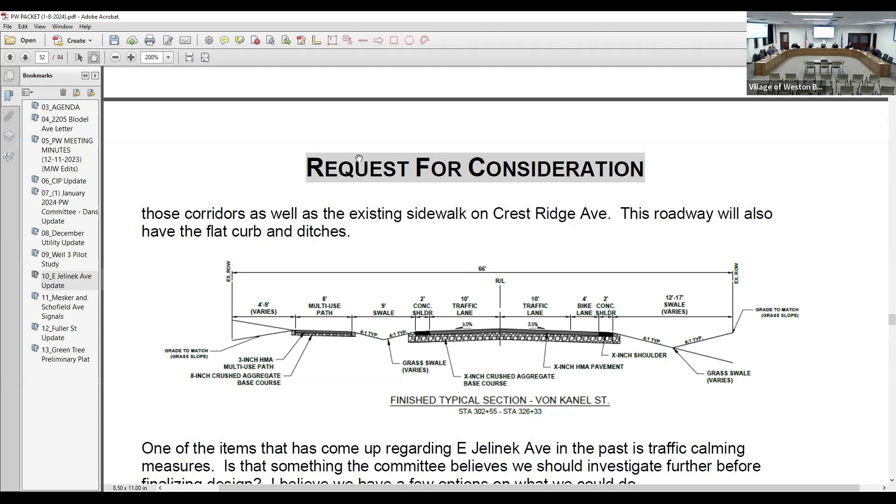All right, now the intersection. Why didn't they put this circle at the center of the intersection? There's no center in there. That intersection is actually offset to the east, because of the multi-use path on the west side and wetlands on the west side. So Von Kanel Street gets slightly off center of right of way. So you bump to the east. Yeah, so the circle in that intersection is actually in the center, but the roadway will shift east slightly, just to not disturb wetlands on the west side of the road, and then there's some power poles and other things that we're looking to avoid.

I think probably the easiest thing to do right off the bat would be to flip those stop signs, to see how that impacts that traffic. It's the least expensive too. Seems to be about the easiest or the best solution to just get that done first, and then if that really doesn't curb it, move on to more expensive alternatives. Is that a four-way stop sign you're suggesting? Or just flip the stop signs, instead of having the stop from north to south, have it come from west to east, so stop control on Von Kanel instead of East Jelinek, or East Jelinek instead of Von Kanel. Set up right, yeah.

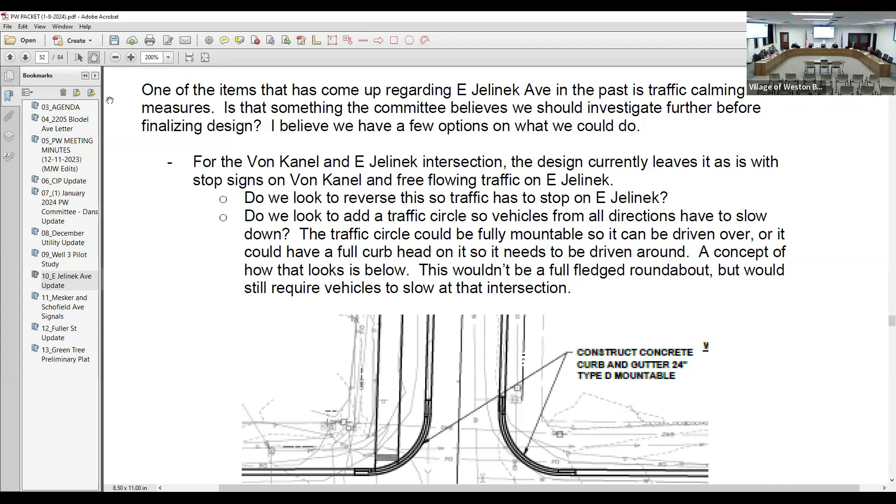Thanks, Michael. Yep, that does it. Thank you. Anything else?

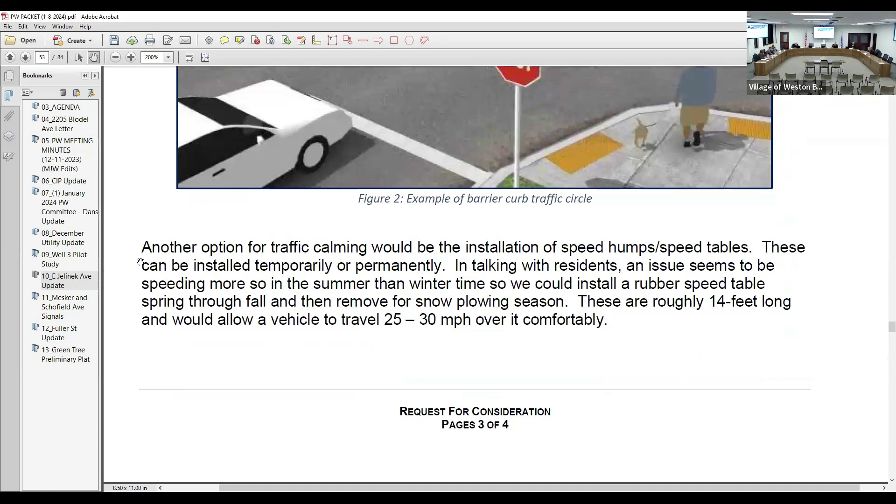Do we need to make a motion? Well, let's see what else you need from us. That's probably good, unless you have any other thoughts or ideas on this. You may come back later if we send it to you. I think you have to make a motion. Yes, I accept the motion.

That we approve the intersection, and also a four-way stop sign, and also right in, right out at the intersection of Jelinek and Camp Phillips. And then possibly have a discussion with the captains about extra patrol presence up there.

And then what about the speed bump? They maybe see how the stop signs and the increased police presence in the area handle it - no speed bump, is that what you mean? To see how that handles it, I guess.

Right there, you know, the patrol was there. I mean, some of my guys got a ticket from him. Yeah, right in that Von Kanel, because they were using it in the morning coming to work. Yeah, so, but it still is a problem.

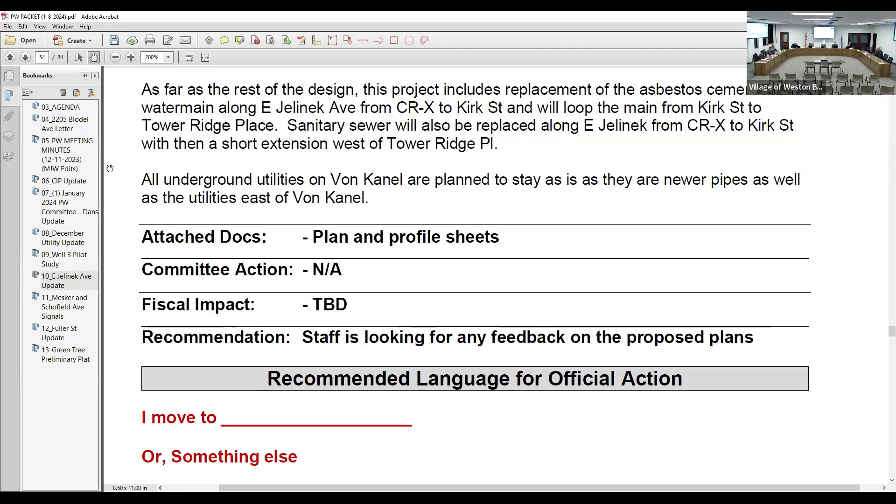It's 7,500 for the removable one. That model doesn't stay in - every spring we gotta put it in, every fall we gotta take it out. Yeah, it comes in 3 pieces - you have the middle and then the 2 ramps. Those just use bars or pins. Yeah, there's some kind of anchor, they're just driven in, correct.

How bad does that rip up the asphalt after years? I guess you just patch it anyway, but.

Yeah, I mean the anchors, I don't think are very large holes. Can we put it at the top of the hill? Yeah, you could put it. I mean, sometimes that's not a bad idea - right before somebody crests the hill, if they're already going 35 before they're at the top, it's a good reminder to slow down before you start going downhill.

And you know, I do know a couple folks that live in that subdivision on the south side, across from where the old trailer park used to be. There's a lot of people that walk back there too. And that's part of it - we'll have the multi-use path on the south side, so we don't have pedestrians in the roadway with vehicles too.

All right, that's it, right? Should be, yeah. Do we want this to be built then? I'll accept the motion, you want me to repeat it? You gotta approve the cross section, approve the speed bump, minimum 2 of them, and then a 4-way stop sign.

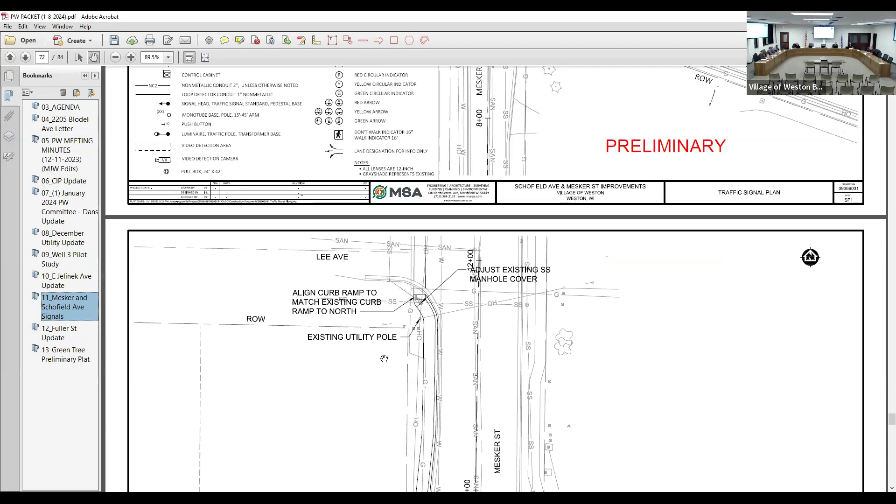And then also trying to get the sidewalk connection up to where it kind of stops on the east side. It stops right at the driveway up here. And then on the west side, it stops at Lee Avenue. So looking to continue that all the way through.

The west side may not be feasible based on some of the initial feedback from WPS, but they'll be looking at what they need to do for their overhead pole. Likely, if they can just relocate this one pole at the southwest corner, it'd be pretty minimal relocations for all the utilities.

There are existing pole boxes for the traffic signals that were installed when that intersection was redone, I believe it was 1998. So we don't have boring or a lot of additional underground work for the traffic signals, which is a cost saver.

So I guess that's where we're at right now. But we had a problem with the overhead line. Currently the way the overhead is, it's this gray line here and it's in direct conflict with where kind of the traffic standard would be on the southwest corner. So that pole needs to get relocated, so we're not having power lines and traffic signals right next to each other. So Public Service is gonna do that.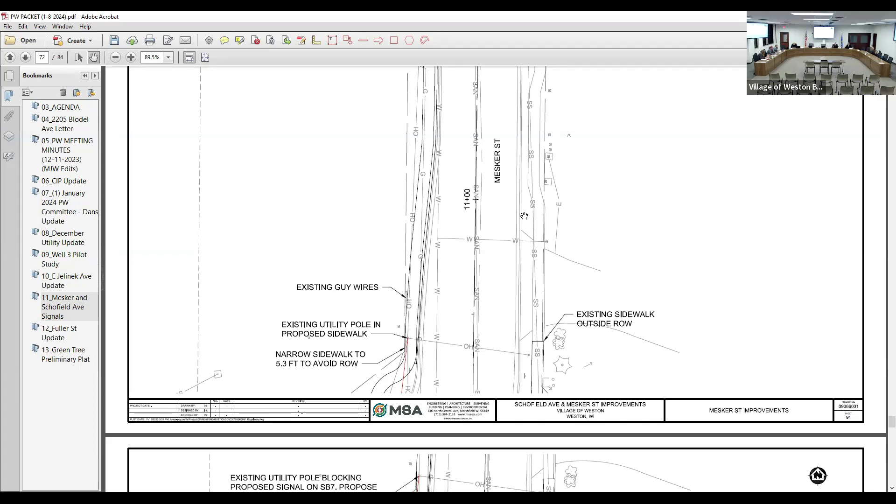I have one real quick question. Timeline wise, how does that line up with Von Kennel and East Jelinek? It's just gonna make it, there's already limited access in and out of that industrial park. Yeah, I really don't foresee a whole lot of underground work. I mean, there'll be a little bit for traffic loops, but that intersection should still be available.

Yeah, I guess we'll have to coordinate that as far as when Von Kennel is being disturbed, to avoid creating a problem. Yeah, we'll have to coordinate it. The Von Kennel East Jelinek project, we should have that schedule known first, so then we can dictate the Mesker schedule off of that. But yeah, we want to make sure there's at least one of those intersections available.

Is there a right turn lane in there? Yeah, so there would be, I guess there's probably not a right turn signal, it's not showing it. So this was just really the electrical, but yeah, so that'd be the straight and through on Mesker, or is it a left turn with a straight and right? It's gonna be a right turn going east on Mesker, and also a right turn going west on Mesker.

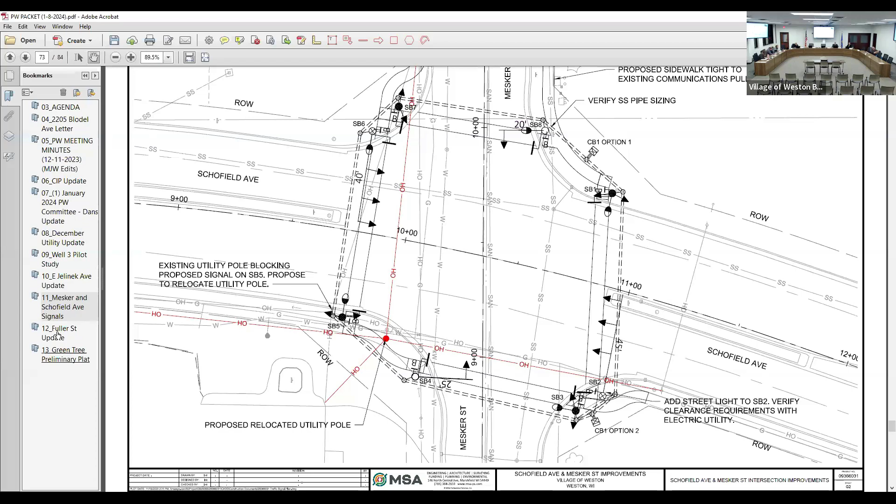Our next item is item 12, Fuller Street and Schofield Avenue update. Excuse me Michael, what's the schedule on this project, on Fuller, Mesker? That should get bid this spring with construction in 2024. So we're gonna have another shot at this project, a better plan to show. Correct, those were the plans for the utility coordination, so they didn't want to get too far in case something major had to get shifted because of power or gas lines.

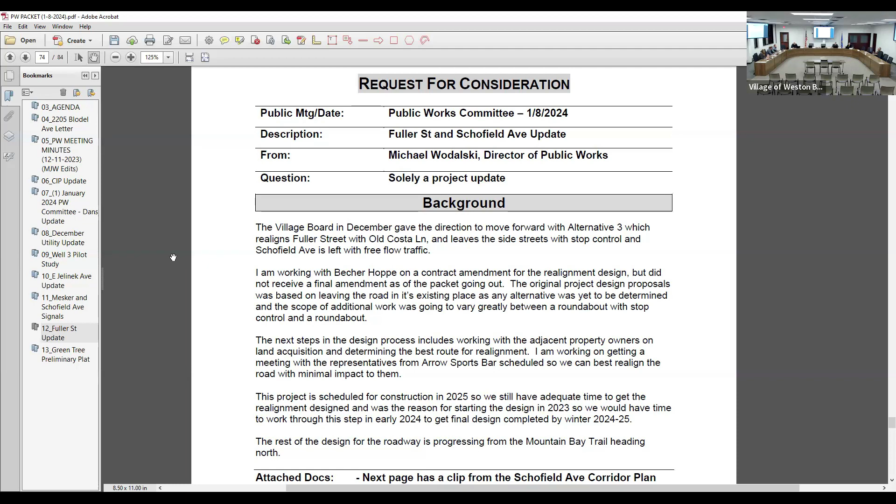Whatever it may be. Okay, and then this electrical one, did you talk about having all the lights turn red when the fire department takes off from there? Correct, yeah, that's a specification for the traffic signals. Okay thanks, yeah, they know you already talked to them.

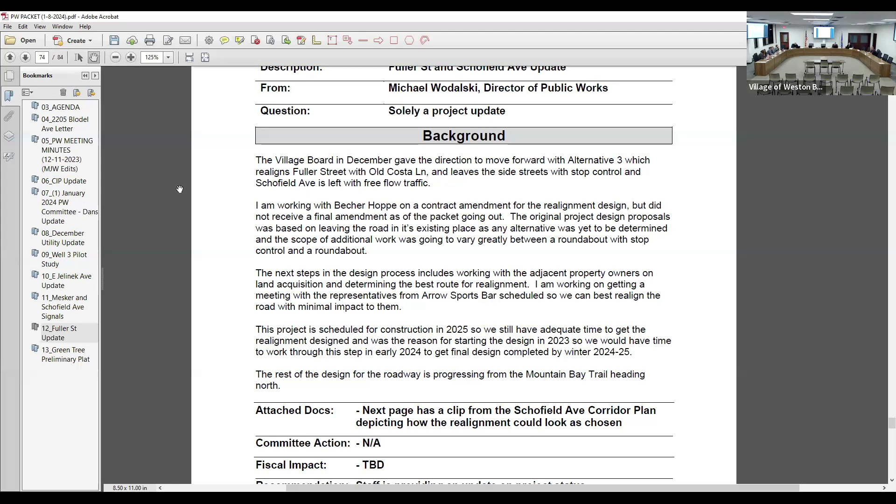Great, item 12, Fuller Street and Schofield Avenue. We talked about this one at the last meeting, went to the board, they recommended alternative 3, which realigned Fuller Street but left the side streets with stop control, and Schofield Avenue free flowing. So we're working with Becher Hoppe on the contract amendment for the realignment design. I haven't received that yet from them. We're also working on getting a meeting scheduled with Arrow Sports Bar.

Between the holidays it wasn't achievable or possible, but we should be getting something here in the next week or so to discuss their preferences for where that realignment goes, what they're more favorable towards, so we can make that realignment design as user friendly as possible.

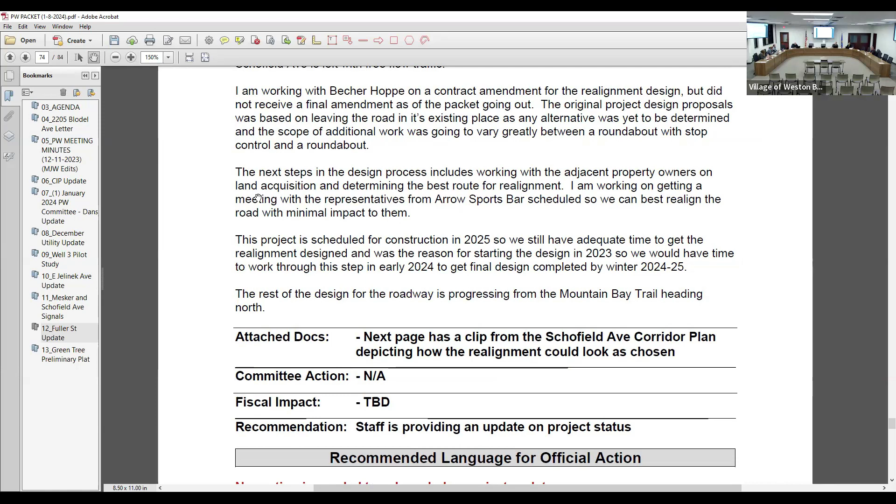So this realignment is not perpendicular to Schofield. Why is it showing this, unless my eye doesn't see good, why does it swing so much on that, instead of a more gradual curve? That was from the Schofield Avenue corridor plan. It was solely a plan.

So that's the thing, my guess is I would try to swing it up here more. I looked at that and thought it just doesn't even look like it makes sense. There's not a 90 degree angle, it's gotta be 90 degrees to Schofield. Yeah, we can swing it sooner. That was just an animation, nothing to worry about. So this is not, okay, because I was gonna say my recommendation is this looks terrible.

Yeah, no, that came out of the Schofield Avenue corridor plan. What is it, you don't like the color in there? I don't like the way it swings so far on that. Yeah, no, that'd probably start up here and come more straight this way, unless for some reason Arrow said, hey, I want this road to come here and then zigzag over. Then I couldn't figure out why, well, I know you need to service that cell phone tower.

Right, so is that why that other road is there? I believe so, so this would get fleshed out. Like I said, this was just the concept from the corridor plan. Okay, yeah, so okay, good. Yeah, it's just the quickest thing I could find that already existed that showed it there and put stop signs up, okay.

So yeah, I guess just an update on that one. Any questions for Michael on this? No? Thank you, all right.

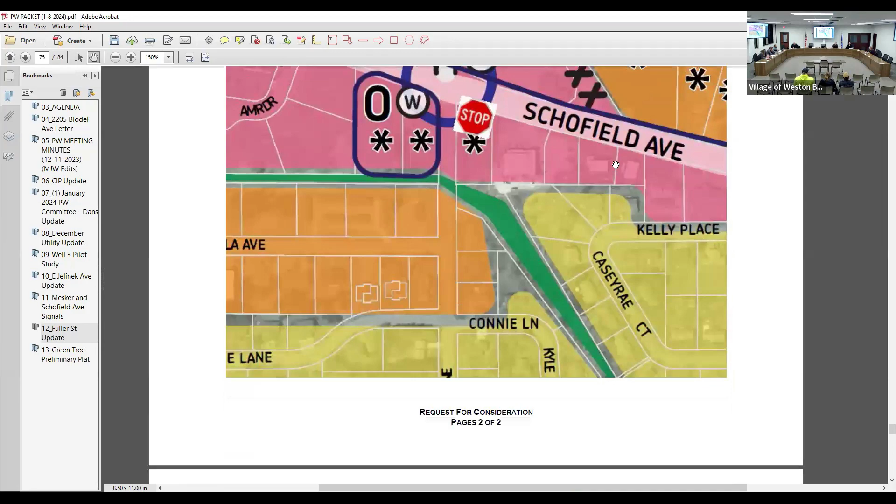Item 13, Green Tree preliminary plat and plan discussion. Sure, so this will be taken up at the plan commission meeting after this, but I'll give you guys a little update on what's being planned. So this is for a future subdivision coming off of Moose and Muskie in the Sandy Meadow subdivision and connecting down to Ross Avenue, just east of Riverbend Road.

So kind of see that layout up there. This is Muskie, Moose, Riverbend Road is over here, and Kramer Lane is just off the screen here to the east. So this was a new 34 acre parcel that was recently annexed in. They're proposing the extension of sanitary sewer and water through. All sewer can flow to this low point over here.

So the lots can be served by gravity. The Muskie intersection or sanitary sewer invert was low enough that it can catch gravity flow from these lower lots through. So we have one exit and entrance on Ross Avenue.

And the other two roads are going to be connected to someplace so people can get out. Yeah, these two dead end stubs already exist, so they'll tie into those two dead end stubs.

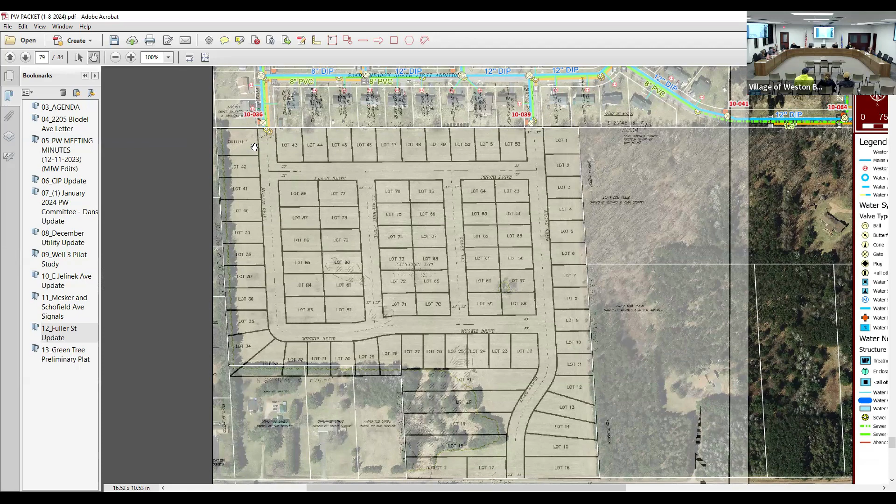And then where is the infiltration pond? So this area on the northwest corner is one pond. Where's the outlet for the pond? It'd be right up here at the very northwest. Was it outlot?

Oh, it just says Outlot 1. And then he's going to use composting in there, plus on-site material. We don't know what the on-site material is or how much fine content is in it. Is the composting not going to prevent infiltration there? Yeah, so those would all have to pass the proper gradations for that.

Who's going to do that, DNR? Or American Engineering would do it. I'd definitely be concerned, plus they've got topsoil they're putting at the bottom and everything else in there, and it's supposed to be for infiltration. Correct, so you mix the topsoil with sand to create a sandy mixture that does allow it.

And then you have something in common there. I agree with your comment. I guess the biggest concern is no future connection over to the east. This subdivision is benefiting from the two stubs that exist currently, so I guess there probably should at least be one over to the east, so that in the future, if this area develops, we don't have another road that needs to come out to Ross Avenue.

I thought that property was sloping toward Ross Avenue, isn't it? There's a high point kind of right up in here, and then it slopes east. I don't have contours to quickly throw on, but...

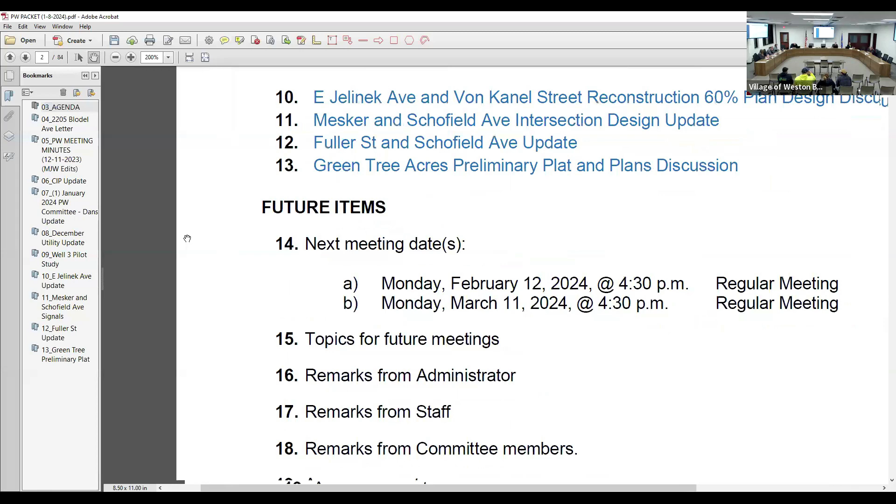Remark from committee member. Nothing, but I see they fixed the light at the intersection of Alderson and Schofield Avenue. Yep, but Birch Street is still no light.

Hopefully they're going to get there today. If not, I don't know about the snow. They didn't get there today? He wasn't there. Van Aert's working on quite a handful of different street lighting things for us right now. I saw him at Alderson with his lift. That's only a 10 foot pole, he left it there.